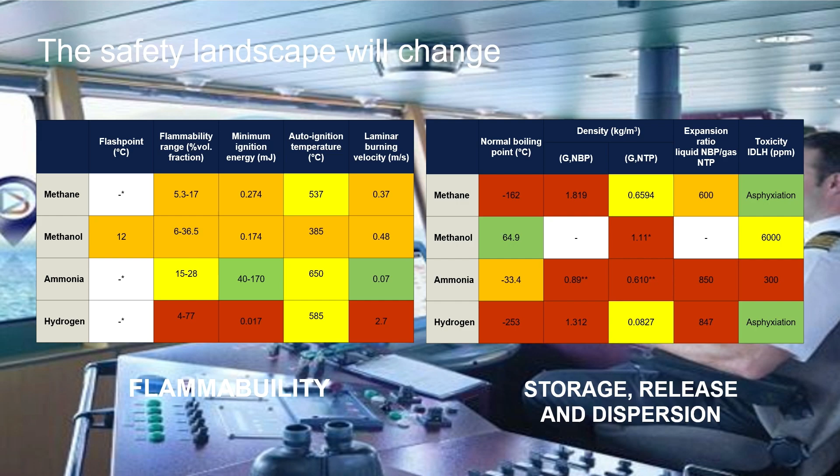As we see, this is just a small overview of the differences of the various fuels that we are currently discussing. We don't need to go into the details of this. I hope this will be covered in the various topic sessions when it comes to the various aspects to be managed - toxicity, flammability, how can we store and transfer these fuels in an efficient manner. So that is the focus that we will keep here today.

We also see that any type of setbacks, if we are not able to introduce these new fuels and new energy carriers in a safe manner, any type of incidents will have dramatic impact on the pace that we are able to pick up new fuels.

These kinds of incidents will make trust in new fuels more difficult to gain, and it will make the time for achieving the change much slower.

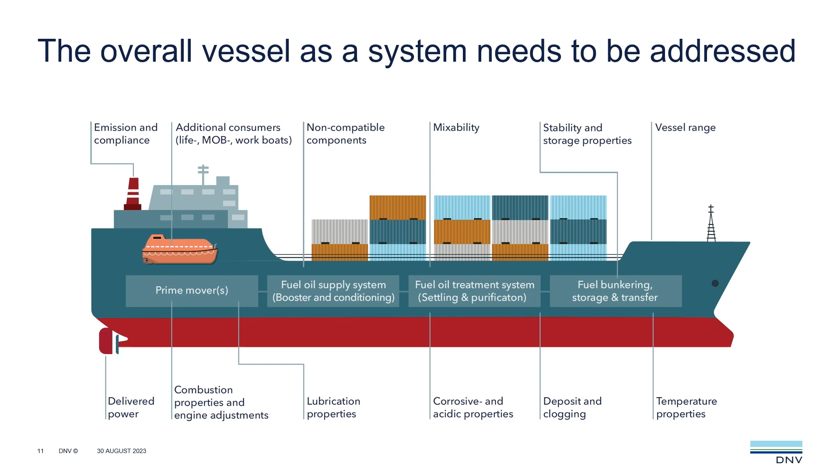We also need to see that fuel is not only what we have in the tank. This will impact the entire value chain and the entire work, both in the shipping company's offices and in the work that we have on board, as well as the knowledge that we have in the supporting supplier organizations, rule developers, etc. We need to look at the entire vessel and the entire chain of logistics and understand how the safety picture is impacted by new fuels, new energy carriers, and new technology.

And of course, being from DNV, I have to talk a little bit about rules and regulations as well. Rules and regulations are enablers for introducing new technology in a safe and practical manner.

We also see that there is a lot of development going on. We can also see that the technology as it is today is maybe outpacing the rule development. That is a gap that also needs to be addressed. How can we do this fast enough in order to reach the targets that we have set?

In addition to that, we also have rules on a global level, we have rules and regulations on a regional level, and of course we have local rules and regulations as well. We all need to make sure that these go hand in hand and are not conflicting with each other.

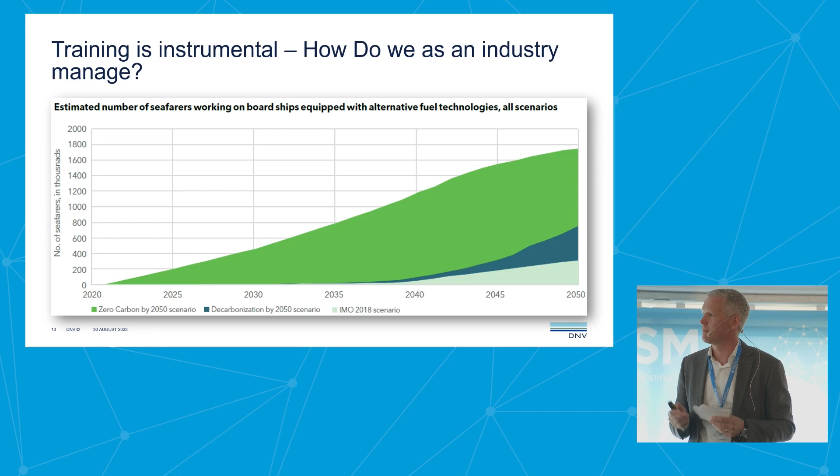Do I have to know all this? How do we make sure that we have training to address these new technologies? Can we do that change fast enough? Can universities training naval architects cope with this pace? Can training academies for seafarers manage this development? This is an aspect that is highly relevant to also address when we talk safety in a safety seminar.

To sum up and to leave the floor to the people knowing these different technologies inside out, let them talk about the safety aspect of these new fuels and new energy carriers.

I think there are some key points. We talked about the technology moving so fast and new technology being implemented. Making sure that rules and regulations are keeping up pace is key. Understanding that knowledge, education and experience needs to be boosted across the entire value chain is also a key aspect moving forward in this field and to enable the change that we're looking into.

Trainers and also, of course, retainment of that knowledge. How do we make sure that the people we have trained, the competence and knowledge that we have within shipping, that we retain it, that we keep the maritime industry a relevant and interesting industry to be part of?

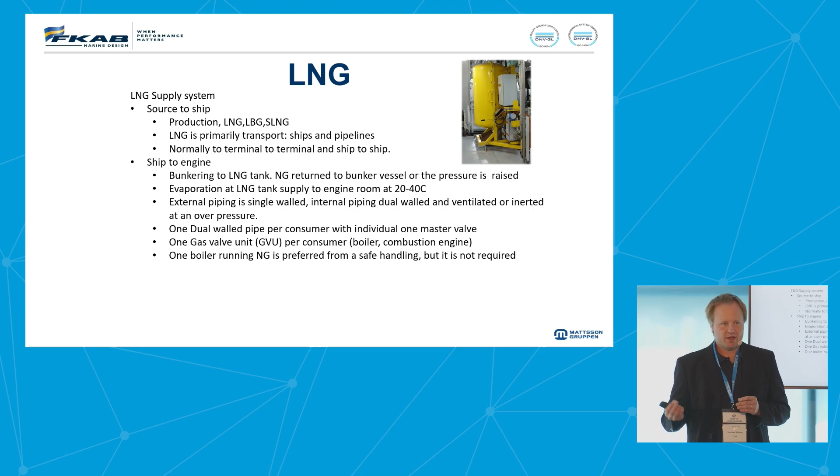When we take out the LNG for usage, we heat it up in the tank connection space to a temperature of 20 to 40 degrees, evaporating it and heating it up, and then we send it in single-walled pipes back to the engine room area where we start to go enclosed. Here we have master valves for each consumer to be able to shut down a consumer in the engine room before we send it in dual-walled pipe to the gas valve unit that is also serving individual components in the engine room. And the served units are boilers and combustion engines primarily.

We also recommend to have a boiler on board that can burn NG. Otherwise, you might need to release natural gas straight into the atmosphere. You can't handle it if you get excessive pressure or something like that. But it's not class rules to have a boiler.

So from safety concerns though, what do we look at? We have cold surfaces, we have the fire hazard, we have leakage, we have the environmental parts, and then we have the bunkering process that we need to consider. So cold surfaces, we are talking about a cold media that you cannot touch. You will get cold burns.

So we need to focus on exposed flanges and pipes. Normally this is mitigated by having either insulation or by putting these pipes in dedicated areas where you normally don't have access, like in the tank connection space. And when you work with it, you use protective clothing. That would be during bunkering procedures and also during maintenance. The NG piping, it's not that cold, so it's not really an issue with the cold surfaces.

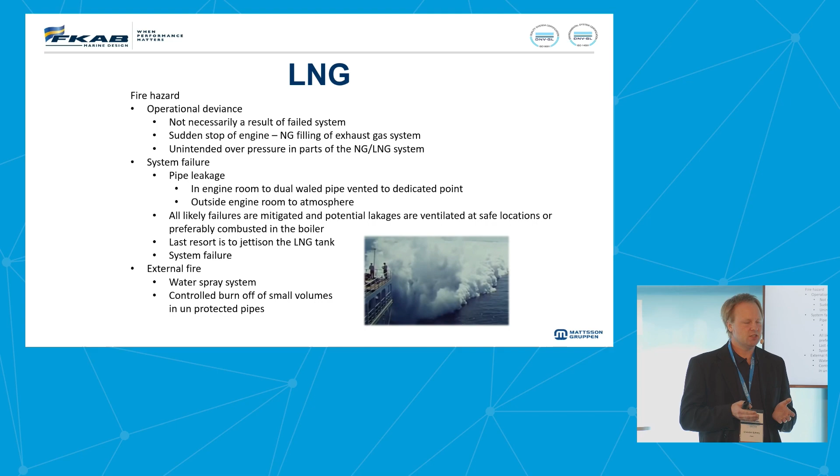Then we have smaller pieces of pipe, like the NG pipes connecting the tank with the engine room. If these burn, it's not good, but it's considerably safe compared to a fire on deck. So leakage then. Leakage could be dangerous since it could fill up a room, making it inert. So people within it would suffocate.

In the engine room, we have dual-walled piping that is either ventilated or inerted with overpressure, and then we have detectors to see that there is no natural gas in those pipes. In case we have leakage in the engine room, we have an emergency shutdown system that will shut down the engine room if we have single-wall pipes. If we have dual-wall pipe and detect gas in the pipes, we will shut off the LNG piping and close the master valve. In the case where you have dual-walled piping all the way, you will switch over the main engine from natural gas to diesel and continue operating.

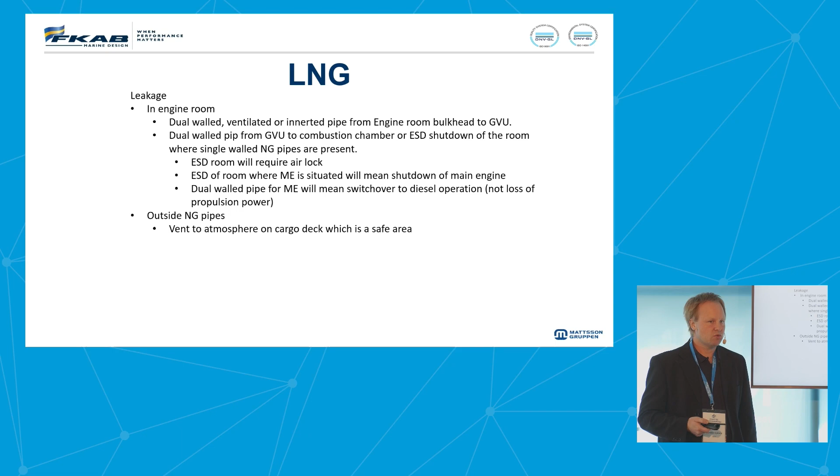In the case where you have emergency shutdown of the room, then you will have a blackout, principally. But we need to shut down the rooms if we don't have dual-walled piping. Outside, if we have damage, then it's vented to the atmosphere. It's the way we have to operate.

From an environmental perspective, LNG is generally positive. When combusted, we have less CO2, less PM, less NOx and less SOx than conventional fuels per energy unit. And in the case of leakage, we do not really have any sticky residues that will float around on the sea and cause havoc. We will only have the gas that goes down into water and then evaporates and it's gone. We can't do anything about it. We could see that in Nord Stream, among other things.

But when we leak methane, we have great greenhouse potential. That's a potential of 23 to 85 times that of CO2. So it's not really good to release unburnt methane. Going on to the bunkering.

A leakage during bunkering, the thing we are most afraid of is to get it on the steel or in between the ships. Because if we get it into the water in between the ships, it could expand rapidly and push apart the ships with damage to the ship's side. Or if it's a large spill, we could also freeze the side of the ship and make it rupture.

We also need to consider this in the bunker station. So the bunker station is protected using a stainless steel drip tray, and then we use water spray or a water curtain to protect the side of the ship. We also have breakaway connections in the case the ships are parting, so that the flow is stopped, and we have ESD connections to actually shut off the pumping on both sides and close the valves in the case that the connection is broken.

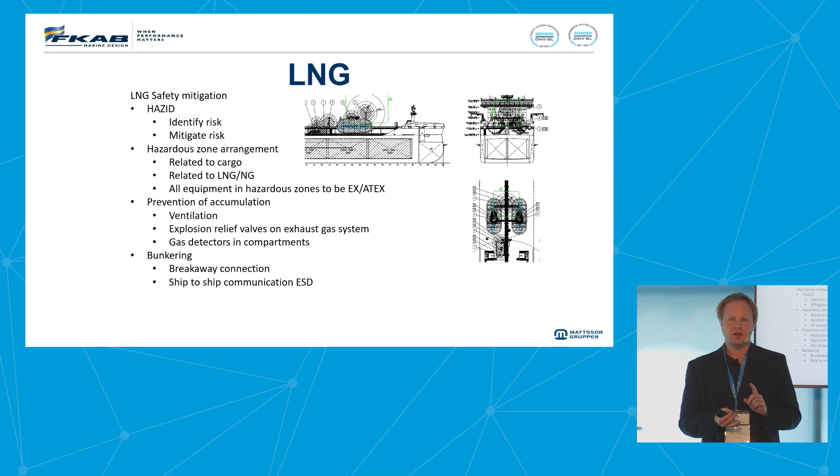And then we need to mitigate it. We need to put the places where we have release of gas in places where it's not dangerous, and we need to see that equipment in this area is EX and ATEX classed. In closed compartments, we need to ensure good ventilation. We have gas detectors to see that we don't have buildups of gas, and for example in the exhaust gas systems where we expect to have the potential of gas filling, we have good ventilation and we have explosion relief valves if it were to ignite.

And as said, for bunkering, we have breakaway couplings and ESD connections to be able to shut down the bunkering procedure. There are certainly more questions and more details to this as well, but that's for another meeting.

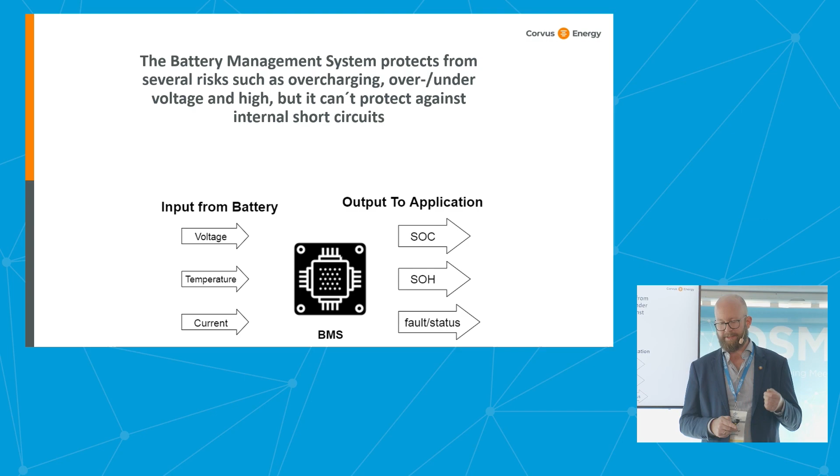They can, in rare situations, have failures due to deviations in production or other defects, or how they are treated on board, which can ignite a thermal runaway. We try to mitigate most of those causes by having a sound and good battery management system that protects the battery cells from external loads such as high temperature, high voltage, and also under voltage. But still you can have that internal cell failure, and that can escalate quite rapidly. You get gas, you get heat, so it's something that you need to manage.

Our point of view on this, at least from Corvus side, is that you need to have a passive system that handles that risk, so you're not depending on other things to limit that incident. You need to build that into the design of the system to handle the risks that the system can cause to the vessel. You need to contain that failure mode. Because if you have a lot of other different systems to protect the vessel from a risk that your new technology introduces on board, you are depending on several other systems that can fail. They can have latent defects, and if you are relying on those and those fail, you are in a pretty bad situation. So we need to have control of these risks.

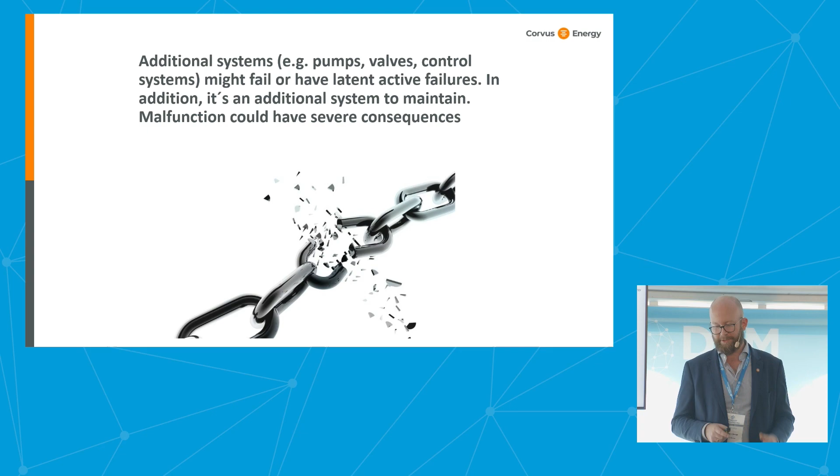And I stole this from some IMO regulations: you should do this through design. You shouldn't rely on safety through the idea that the new technology you introduce on board is safe due to some operational procedures or anything else. It should be sound and good design that gives the safety to the system and also the vessel.

And this is something that we need to do together, because safety is not done by one. And when we are introducing all of these new technologies, such as batteries, it's still new technology. Even though we have more than 800 projects that have been on board vessels for 7 years, there are still things that we don't know. And we need to use that learning to improve the safety, because as Mikael said, if we get huge failures, we will stop the transition.

We use all of that knowledge that we learn from all of our projects to share, and also share the failures we have with our clients, our ship owners, and the regulators. So we openly share when shit hits the fan. We tell what went wrong. If it was our fault, we will tell. And we also need to give support to our ship owners or our clients that have these technologies on board, so if something happens, they can reach out, and we can help and support them.

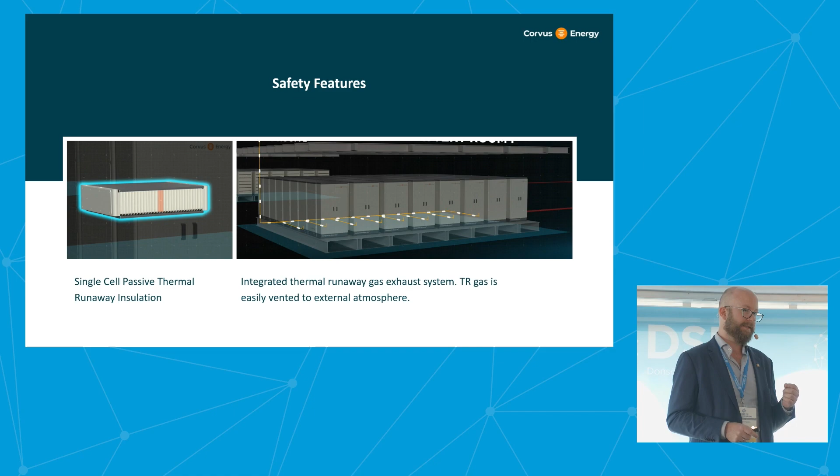But in addition to containing it to only one cell, we also want to have that gas taken out of the battery room. We don't want that gas released into a battery room on board a ship, you have sources of ignition there, you have the batteries themselves. So we want to have that gas taken out of the battery space. Our battery system is enclosed, so if you have a cell failure and all of that gas is released, it's ducted to a safe location outside the vessel and to atmosphere.

And yeah, this is probably a bit overachieving because the requirements are not on cell level, but we have done experiments and seen what will happen if you release all of the gas and ignite that. We also need to keep in mind that these are systems that go on vessels, not the same as battery systems in cars. In a car, you have 4 people and 4 emergency exits, so it's easy to get out. On a vessel, you need to increase that safety level compared to automotive battery systems because you are on a ship, far away from help, and you need to ensure the safety of the crew and passengers. So we need a higher safety standard than automotive batteries.

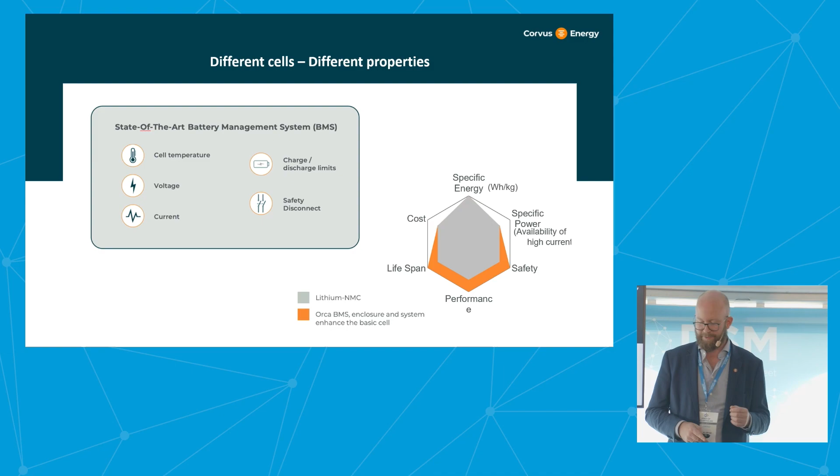So we need to build a battery management system that protects the cell so it doesn't do things that it shouldn't do. And also keep in mind the lifespan of the battery system. We want to have it in operation as intended. So all of these are parameters we need to monitor to ensure a safe battery system, because if you overuse it, use it more than it's designed for, with more cycles and all of these, you can deteriorate the cell, so you might introduce a thermal runaway due to that as well.

So there are a lot of things we need to keep in mind when introducing batteries. You can have failures or risks that are external to the energy storage system, such as over temperature in the room, fire in the room next door. So mechanical impact, deformation, all of these things can create a hazardous situation with the battery system. Also water, external short circuits, and all of these are things we need to focus on when implementing it on board.

And also there are fault conditions that are internal to the battery system, such as internal short circuits creating thermal runaway. Production faults also can lead to thermal runaway. And also sleeping faults or latent faults, such as software issues and all of these things we need to have control of to ensure that the battery system is safe.

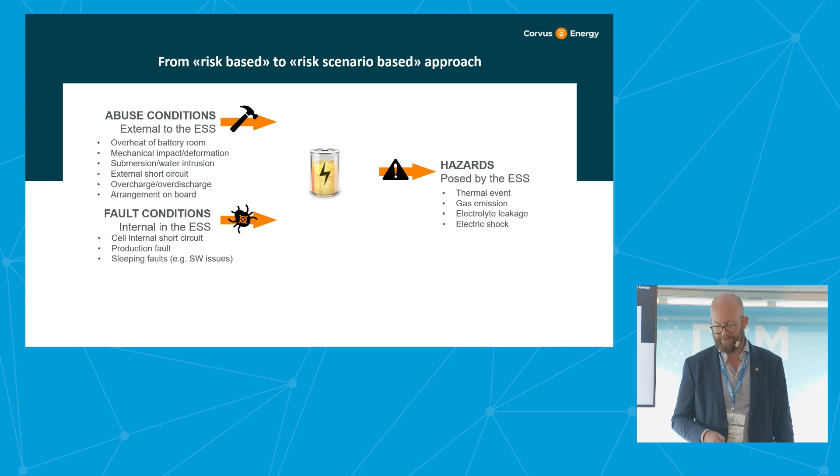And all of these things can lead to hazards posed by the energy storage system. You can have thermal events, gas emission, electrolyte leakage, and electrical shock. So it's a new thing that we introduce on board, and we need to focus on all of these things when implementing it on board vessels, because all of these are something you get when you get a battery system on board. You can't move away from that.

So it's not something that only one stakeholder can manage. It has to be a cooperation. It has to be us as a battery supplier — we need to give input to all of the other stakeholders on how to safely introduce these things on board. The system integrator plays a vital part in managing the batteries, using the batteries, and how it's integrated on board the ship. Shipyard and ship designer are also key stakeholders in ensuring that the battery system is installed in a safe manner, complying with regulations and specifications, but also having a safety view on how it's installed on board. Approval bodies and the ship owner and operator as well.

So crew training is something that's vital to ensuring a safe battery system, because you need to keep an eye on different things than you used to do when looking after a diesel engine. There are other external hazards you need to keep an eye on. So crew training is very important, and that's one of the things we have seen from the incidents we have had, is that the crew wasn't necessarily sufficiently trained, so they didn't act as they should have. They used everything they had instead of going in a strategic manner to mitigate the cause.

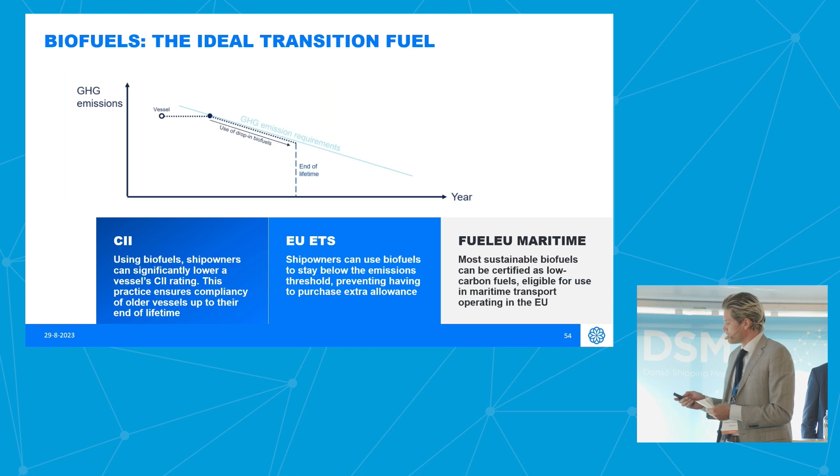Of course, the very monumental MEPC 80 was a great step for biofuels, paving the framework for the use of biofuels for your IMO DCS reporting. Basically, what it says is that if you're purchasing biofuels that are vetted by a certification scheme, meet certain sustainability criteria, and have a minimum CO2 reduction, then you're able to report this under your CII and IMO DCS.

Also a big breakthrough is that there's an interim guidance that approves the tank-to-wheel, tank-to-wake approach as 100%, because biofuels are then seen as a 100% reduction due to their biogenic origin.

Then there was the introduction, safety-wise. I would say biofuels are, in the whole range of future fuels available, on the very safe side. So that's easy—just before the coffee break, we can relax. It's not the biggest issue when thinking of biofuels, but I'll address a couple of points.

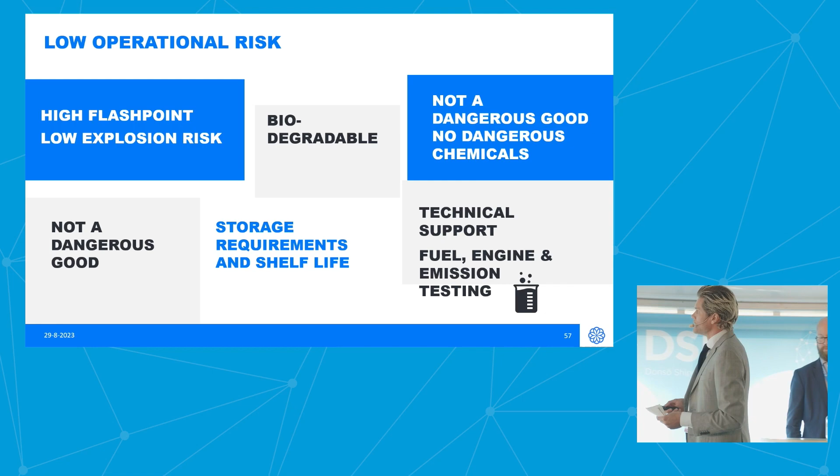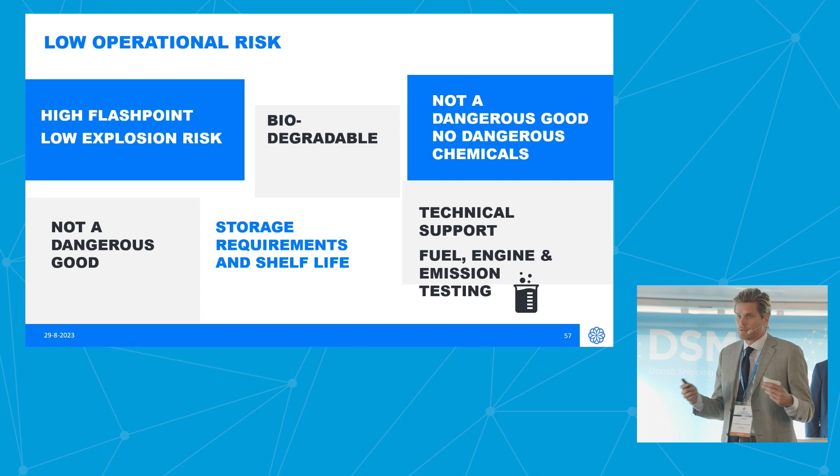Biofuel has a high flash point, above 100 degrees Celsius, so explosion risk is very minimal. It's a biodegradable product, which is good for environmental purposes, obviously. It's not a dangerous good, and it doesn't contain any dangerous chemicals either—no benzene like fuel oils. So that all makes life easy for the use of biofuels, and it's a very easy way to implement a decarbonization effort.

Important things are storage and shelf life—two items that are important to know about for operational continuity. When it comes to storage, you'll need tank heating for biodiesel. The fuel needs to be stored at a continuous temperature, about 10 degrees above CFPP, with CFPP typically lying around 8 to 15. So it's important to notice it will be heated at all times.

Shelf life is a question we get quite often—how long can you store it on board? We recommend for 100% fuel a maximum of 4 months, which gives you some space. We've done quite some tests with different clients, whereby we've actually tested it after six months, and that all went fine.

If you're not certain about the compatibility, the homogeneity, or the working of the fuels after 6 months, we can always do a spot test to see if it's still good—this is for 100% biofuels. If you're blending, like making a B30 blend, you can easily store it up to a year. Or with renewable diesel, you can store it for much longer.

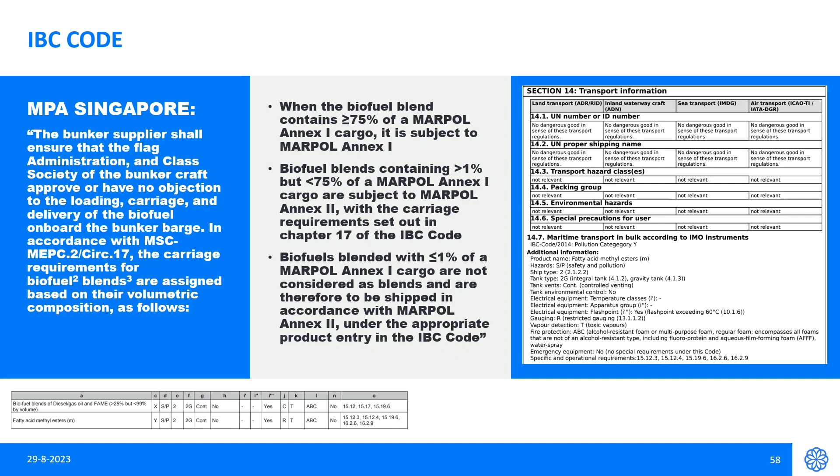MARPOL dictates that when you have more than 25% biofuel on board, the fuel is seen as a noxious liquid, meaning the treatment should be done as if it's a safety and environmental hazard. This means you need a very different type of barge than fuel providers actually have on board or in their system right now.

And that makes it a little bit difficult. So if somewhere around the world you want to deliver more than 25% biofuel, you would need a completely different barge, namely a chemical tanker.

Now if you look at Europe, this is not the case, because over the years there's been an agreement for inland barging whereby it's allowed to have 100% biofuel in your barge. So in countries like the Netherlands, which is the biggest port for biofuels so far, you can just deliver 100%, with no limitation on the uptake.

Looking at another big port like Singapore, you'd have to limit up to 24% biofuel. That being said, it shows the track record is there—that from a safety perspective, it's not difficult to deliver more than 24%, up to 100%. So the big question to the IMO is, why are we still limiting the uptake of biofuels outside of Europe?

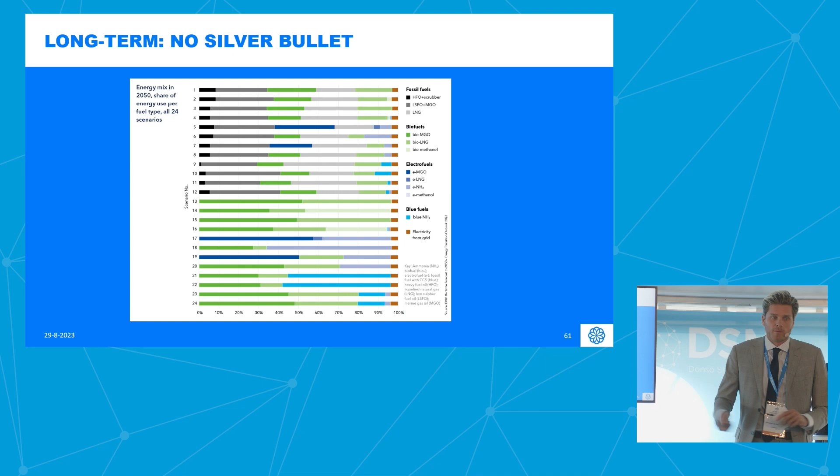Availability is of course not only about location, but also the availability of feedstocks. Another nice graph from our friends at DNV shows the expected fuel mix for 2050. In green you can see, across 24 different scenarios, the role biofuels will play. So will there be enough volumes to serve all of this green part of the shipping industry?

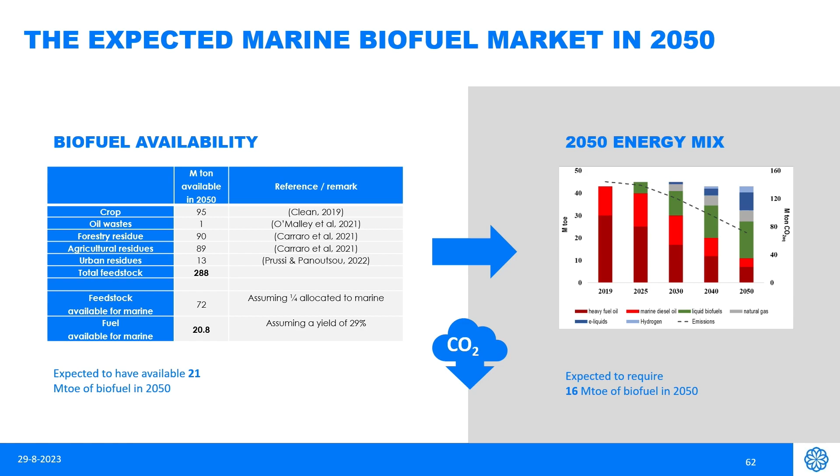We've done our own research. On the short term, we really don't see this problem—the demand doesn't meet the supply at all yet, so there's a lot of room to grow.

Looking further into the future, to 2050, we've done our assessments looking at waste and residue streams. Of course you only want the sustainable biofuels, then allocating the amount of available feedstocks to the marine industry. We've taken about a quarter, since feedstocks are also going to aviation and to road transport.

All in all, we expect to have 21 megatons of biofuel available in 2050, whereas the expected demand—looking at that DNV slide we just looked at, from a big study—is only 16 megatons in 2050. So we should be in the clear on that side as well.

Last point I want to discuss is sustainability and transparency—super important now that the biofuel business is growing. How do you make sure you're actually buying a sustainable product? We've seen earlier in the year some fraudulent feedstocks coming from China—a big problem, of course, and it makes the whole biofuel business look bad.

So what do you do? You need to select a supplier that has done its due diligence, that knows its own suppliers and has a good idea of the whole supply chain.

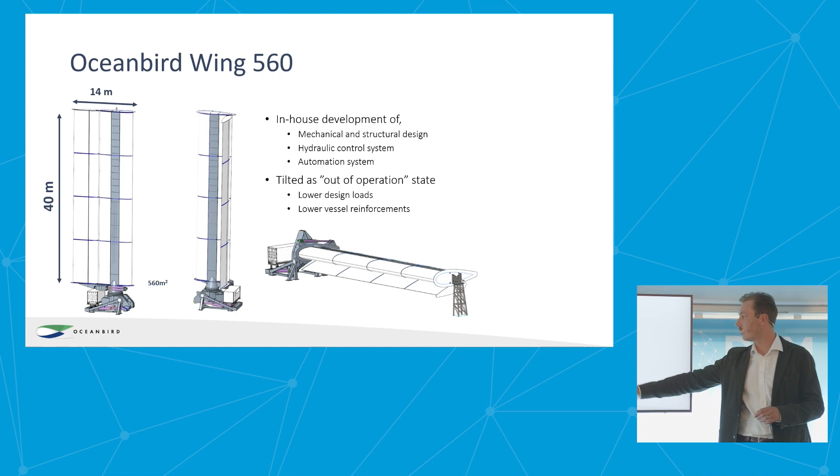We are a wing sail provider. This is our first product that we are working on, a wing sail that's 560 square meters. We have in-house development of mechanical automation and hydraulics, and our unique system is that we have the out-of-operation in the tilted state. So we would like to lower the design loads on both the wing sail and the vessel itself.

And we just recently were approved, or granted an approval in principle from DNV. Later this year, we will start the assembly process of our land-based prototype in Landskrona. And next year, we will have a seagoing prototype, or seagoing test rig, on board Wallenius Wilhelmsen's vessel, Tiranna.

But we are not the only provider out there, and there's a wide range of technologies. We also have the rotor sails that's been up and running for 12 years by Norsepower. It's basically large spinning columns that utilize the high RPM to induce the Magnus effect to thrust the vessel forward. We also have soft wing sails. The difference here is that they have the membrane made out of soft fabric, so you can allow the wing area to be reefed in order to reduce the loads.

You also have the ventilated foil systems. Here you utilize fans in order to suck the boundary layer around the wing profile to make a more stable and efficient flow. Rotor sails and suction sails are very efficient if you look at thrust per square meter, but they are also the ones that require the most energy in order to operate them. And it's important to highlight that the largest products within this portfolio can produce the equivalent of 3 megawatts of main engine power. So if you put a few of these on any type of vessel, you could basically sail.

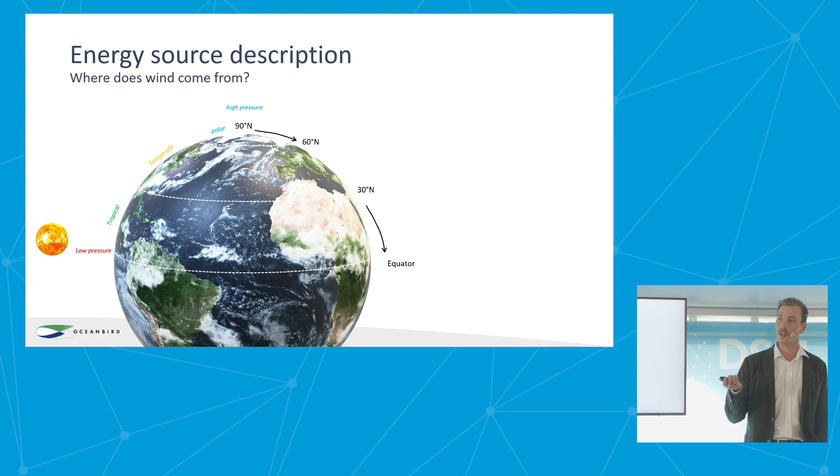This might be trivial to some of you, but where does wind come from? You have different heating of the Earth's surface due to the tilting of the Earth. So if you look at the different latitudes on Earth, you can see that along the equator, you will have the air with the most heat. So that will be the low pressure area. And in the polar zones, you will have high pressure area. And air tends to go from high pressure to low pressure. And once it's been heated up, it will rise up and recirculate back.

In between 30 and 60 degrees latitude, you will have the same phenomena, but the other way around. And this will happen all along the longitudes of the Earth. And if you look into the polar zone, you can see that air that goes from north to south will tend to go to the right due to the spinning of Earth. That's what we call the polar easterlies, and you will see the same phenomena in the tropical zone, also known as the trade winds. And in the temperate zone, we have the westerlies. So that's the global pattern of the wind.

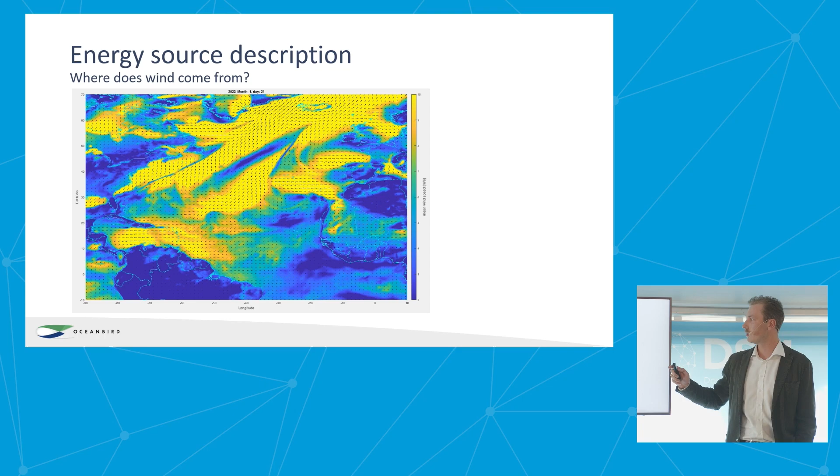If we look into more detail, what happens from day to day, you can see that wind changes quite a lot in both magnitude and direction, right? So it's hard to predict where the wind will be. You can see that pressure is basically moving all around the northern Atlantic. If you break it down and look at wind as an average from year to year, we had 2010, 2015, and 2021. We can see these global patterns being the trade winds and the westerlies.

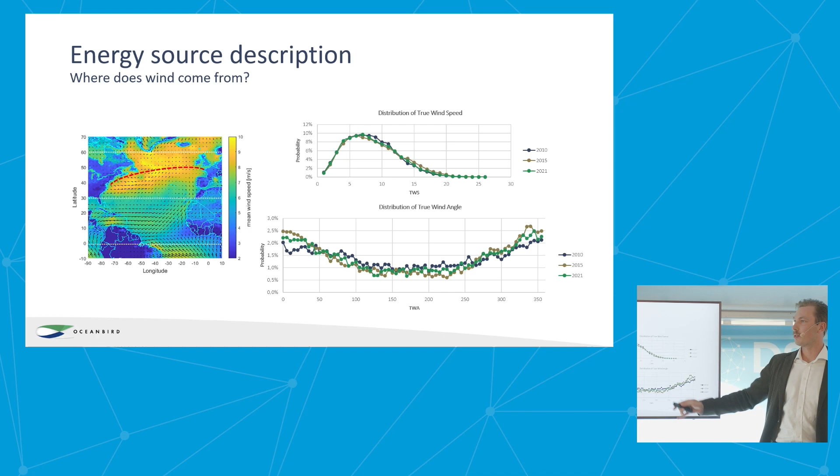And in the area in between here, you basically have no wind at all. Back in the days, that's where they dropped the horses in order to have some water left on board. So that's called the horse latitudes. Sailors would basically get stuck there. If we study a route along the northern Atlantic and look at the probability of wind, both in the true wind speed and true wind angle, we can see that the distribution is quite similar from year to year. So what can we conclude? Well, from day to day, the wind is changing quite a lot, but it's reliable from year to year. We know well enough how much energy there will be out there.

Wind can reduce the operational expenses of the vessel. We don't have any emissions, and it's future-proof. It can be combined with any fuel that's out there. We don't need any additional infrastructure. Wind is basically the free fuel. That was the pitch, and now we can go into the safety challenges.

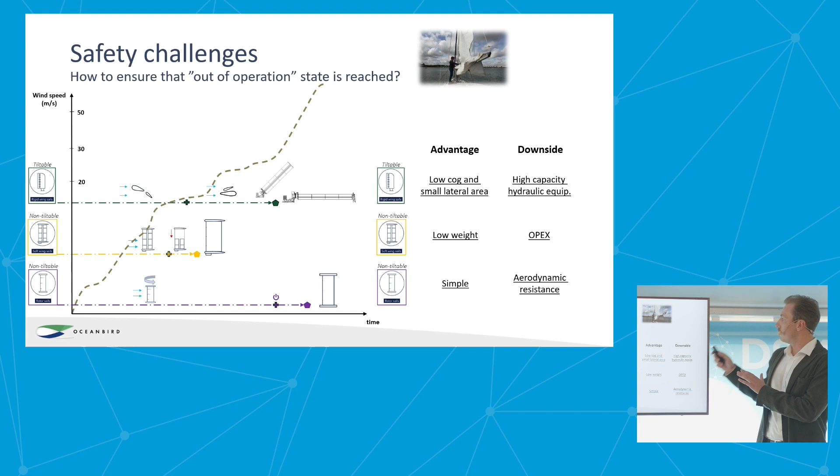The advantage is low center of gravity and small lateral area, but you need high capacity hydraulic equipment in order to ensure that you can do this procedure in all types of winds, right? These are just some advantages and downsides, but what I would like to emphasize is that there isn't one product that suits them all. It's all dependent on what kind of segment you look at, where you operate, what trading speed you have, and your cargo handling on board.

So it's quite complex. But back to the question, how do you ensure that you reach this state, independent of the solution you have on board? Well, one very effective mitigation is the failure mode effect analysis, where you basically go from the bottom up. You look at every component that you have in your product, the function, its subsystem, and you imagine that you have a failure. What is the cause? What is the effect? What is the severity? And how do you mitigate this? If you do this with relevant stakeholders, you can find things that you wouldn't find otherwise.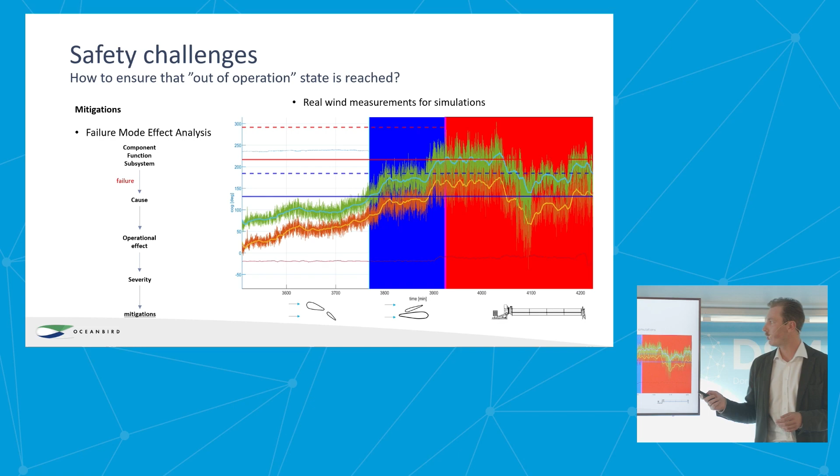Another safety challenge is the impact that your product would have on the vessel, and it's very vessel dependent. It's a function of where you place your unit in regards to the size of the vessel and your operational levels. But what we can all conclude is that the wind propulsion unit will not only deliver thrust, it will also deliver side force, right? So it will impact the leeway and the rudder of your vessel.

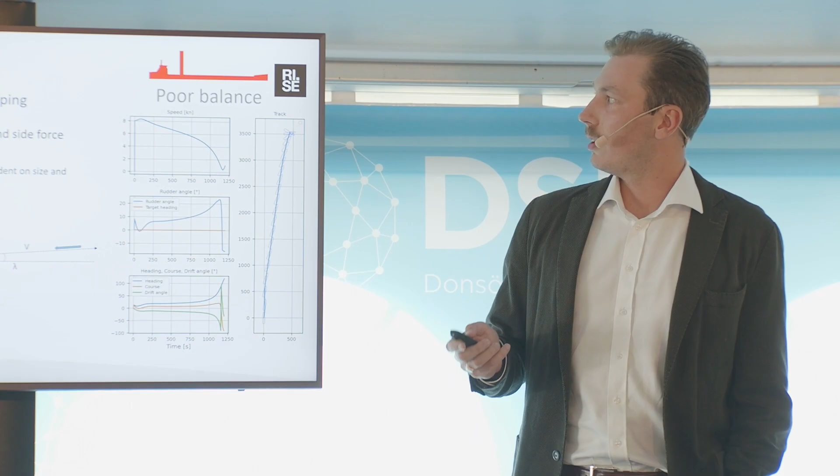Here is a simulation case done by RISE. They have looked at a standardized vessel and they've put a WPU close to the bridge. And it's a time domain simulation. So you can see that it's starting out with 8 knots of forward speed. Its only objective is to keep the course, right? To keep the track. But you can see over time that the rudder angle is just increasing. And when that happens, the resistance is increasing and the speed is reducing. So this is a good example of poor balance on board a vessel. This needs to be studied in detail.

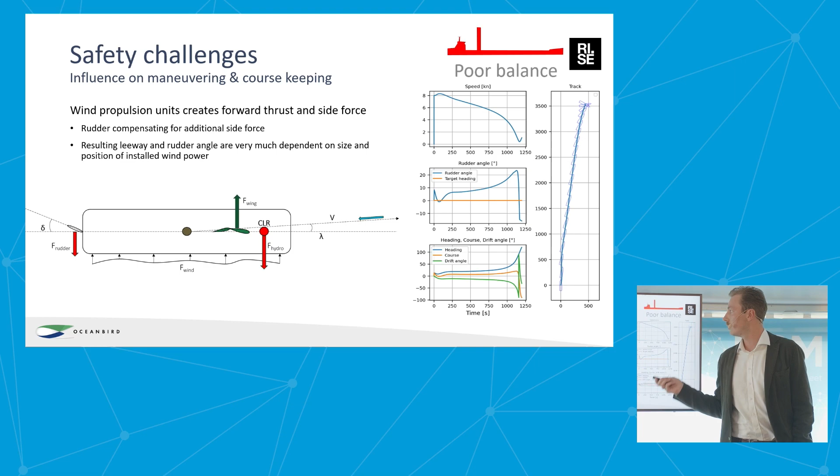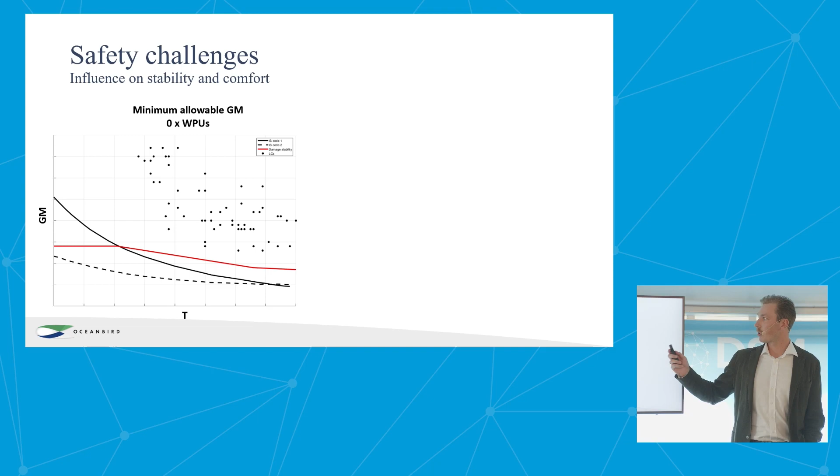Lastly, we have the influence on stability and comfort, and it's a trade-off here. For naval architects here, you can see that you have a GM versus draft curve, and that for all loading conditions, we are fulfilling the criteria. But what happens if you put on 4 large wind propulsion units? You can see that we are not fulfilling all criteria anymore. So as a naval architect, what would you do? Well, the simple answer here would be that you need to increase the GM of your vessel. But is it really that simple?

So to summarize it, what kind of mitigations do we have? Well, perform continuous FMEA and hazard analysis to identify areas in your system that need to be further investigated. You can develop simulations and train with measured environmental data to predict unpredictable events or to teach the system. You need to involve stakeholders early on. That could be the crew, could be the flag state, could be DNV. And for vessel designers out there, you need to allow for vessel design iterations in order to look into all of these aspects and design a really good vessel.

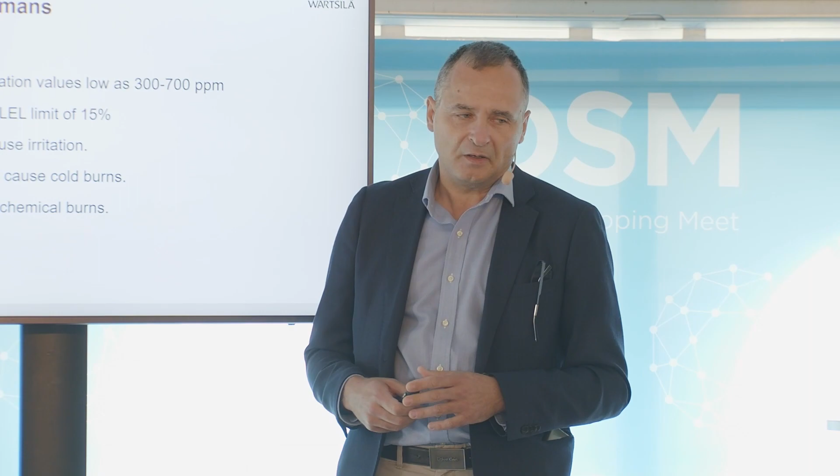When you are exposed to ammonia and you don't have personal protection gear, you will get irritations in your nose, you will get irritation in your eyes. Ammonia binds to fluid in our body and then starts to cause irritation and destruction of tissue. So it's really dangerous to be exposed to ammonia, and this is why we need to be very careful. On the other hand, it can harm us in so many ways, but at least it will not give us cancer. So something positive about this as well.

We have been using ammonia since 2021. So we have built operational experience with ammonia for almost 2.5 years on different engine types and in different facilities. Here we can see our test facility that we are using in Norway on Stord Island. And together with the Catapult Center and other partners, you can see here, we have established a testing facility with a Wärtsilä engine. This is a 34DF engine. It starts from a gas platform.

We heard this morning so much about LNG from Christian, and we can only say that there is a really good baseline from the LNG industry. There are procedures, there are technologies that could be applied more or less directly, and they are 95% plus identical. We can use that, and then we can build on that and add the additional safeties for ammonia. So this is a gas engine to start with, and we use this engine in a facility where, you can see, we try to simulate a ship.

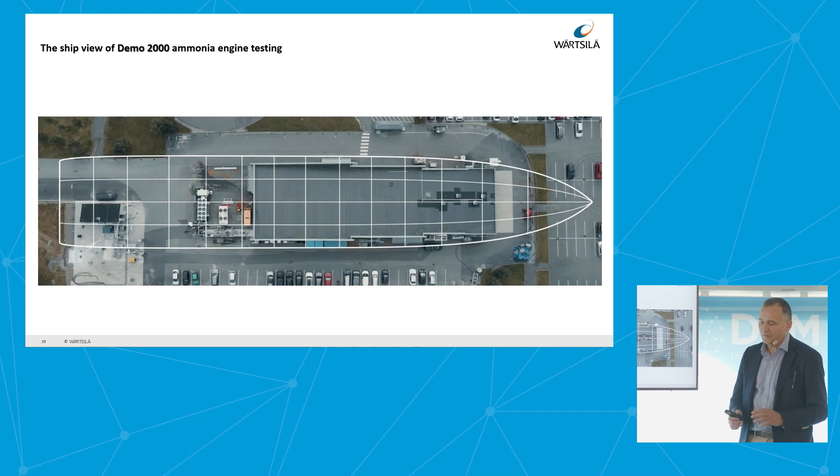So, from the bunkering station where we can bunker liquid ammonia to a tank and to the fuel supply, and here in the middle we have control. We also have connection to the electric grid, and then we have the ammonia engine in front, and we also have the full exhaust after-treatment processing.

This engine has been running on ammonia for 6 months, and we have planned to continue running ammonia for another 6 months at least. One of our test facilities. We have one more test facility in Finland where we test 2 other different engine platforms as well. So we are testing ammonia on 3 different platforms.

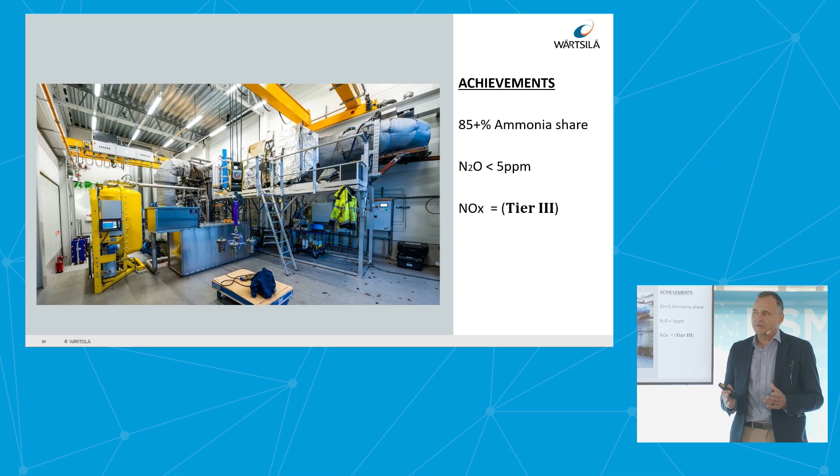What have we learned then? We learned that we can use ammonia as a fuel in marine applications. We have had good results with up to 90% ammonia share at certain loads, but it's not as easy as it may sound. It has challenges to use, but we have achieved at least 85% ammonia energy share. So we can replace 85% of the energy of the conventional fuel with ammonia, which does not have any carbon. So it's carbon-free.

A lot of discussion has been about nitrous oxide, laughing gas. This is a highly potent greenhouse gas, with a potency of around 300 compared to CO2. And here we have managed to keep the nitrous oxide emission below 5 ppm at the exhaust. So, really good results. I think with this setup we can also say that we lower CO2 emissions by 80%. So this is what we are happy with.

You will need an SCR in order to handle the emissions from ammonia. When you burn ammonia you will have a different type of emissions. You will have unburned fuel, because ammonia is very inert and hard to combust to 100%. So there will be some ammonia slip, and you will have nitrous oxide, laughing gas. All of this could be handled in the SCR.

If you look into the same facility, this facility can also be used as a training facility for future ship owners, where we can train both bunkering and other operations.

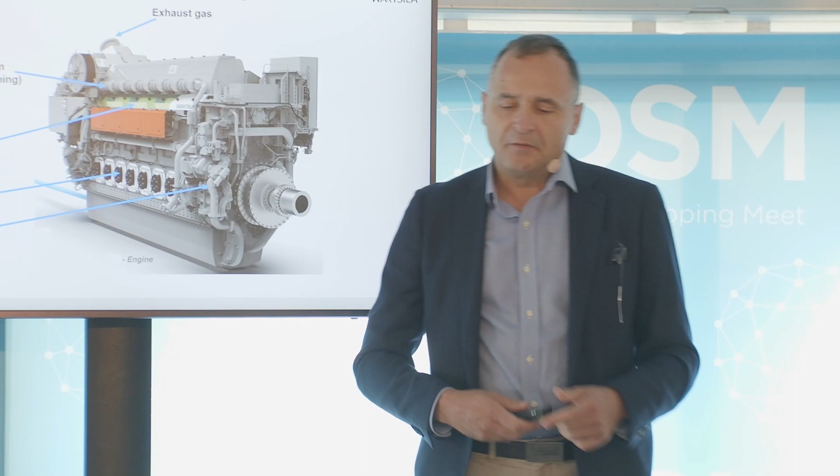So, good base, bunkering went well. There was no leakage during the bunkering process. Everything went smoothly, the first bunkering. But if you look at the engine side of the equipment, here you can find a couple of potential points where you can actually have leakage from ammonia. You can have leakage to the exhaust gas, you can have leakage to the crankcase, you can have leakage to the liquid fuel system. So we need to equip the engine room with various detection sensors in order to be safe and detect any potential leakages.

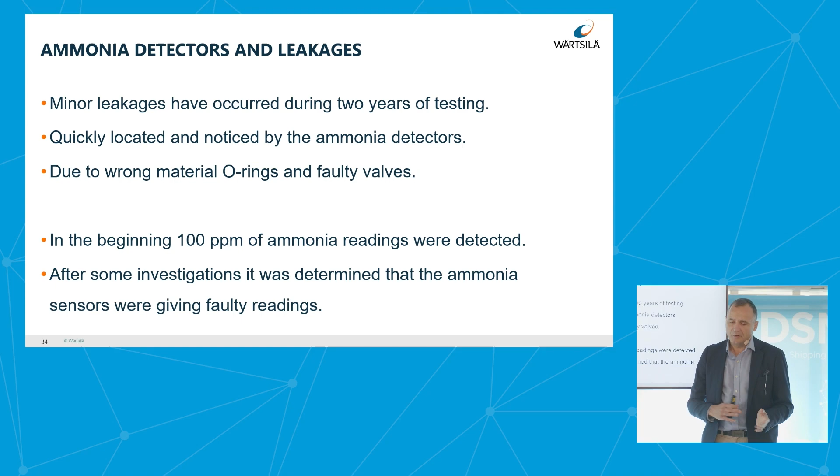During testing we have had a couple of minor leakages. During the first testing we had minor leakages mainly due to the wrong materials in the system. Some O-rings were not feasible, not good for ammonia, and then we also had some faulty valves. Once we handled these teething problems, we did not have any more leakages on the ammonia system.

Also, the sensors in the beginning were detecting 100 ppm, but since we could not smell or detect ammonia leakages, once we investigated further it was found that these were faulty readings on the sensors. So a lot of teething problems in the beginning, and of course there will be teething problems in the application on the first two ships, but no major ones from what we could see.

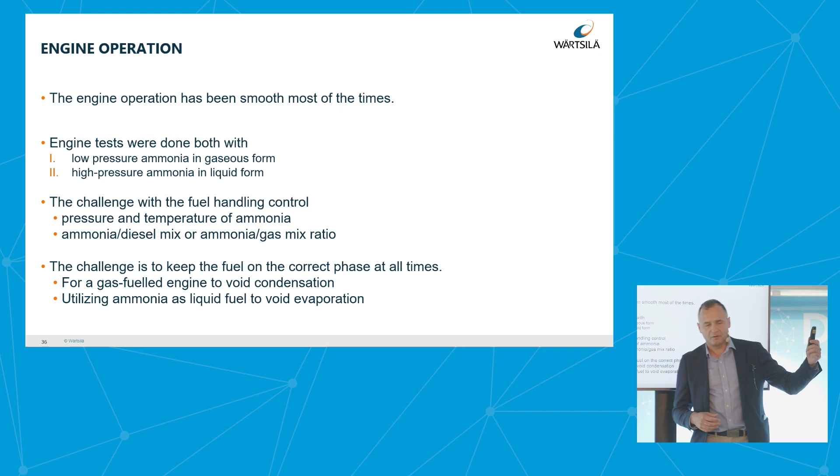Another challenge is to keep the ammonia either in gas or liquid form, depending on which system you use. The tank might be located in one location on the ship, with maybe 40-meter pipes to the engine, so you need to make sure the ammonia does not condensate if you're using a gas system before the engine. Heat trace on the ammonia supply system will probably be needed depending on the pipe length.

What more have we learned? During normal operation, we use the same principle as for LNG. The engine room is the gas-safe space. Everything is double-walled and monitored. Ammonia detectors and gas sensors are installed in all locations where leakage can be expected.

We have been running in two different modes: the Otto combustion mode, and also with high pressure liquid, which is still in the research phase. We believe gaseous ammonia will be the first product to market, and liquid ammonia will be the second.

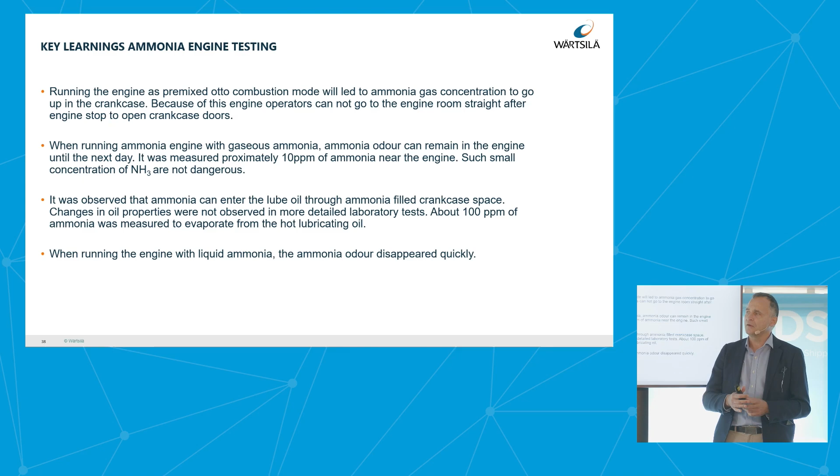As mentioned, about 100 ppm of ammonia were measured evaporating from the hot lubricating oil. This means that when you run on ammonia and stop operation, you cannot just open up the crankcase and start repair work. You need to monitor for ammonia content in the crankcase, and since the crankcase is ventilated, that ammonia will need time to be ventilated out.

Personal protection equipment is really important, and this is where safety trainings and procedures should be in place—ones we are developing now based on our accumulated knowledge and learnings from the testing.

Even though no major leakages occurred during our testing at both of our facilities, some small ammonia leakages were there. So you can expect that some ammonia might leak into the engine room during operation, which is why personal protection equipment is really important, along with other safety measures like ventilation and ammonia leakage detection.

Additional design elements are required, especially when it comes to materials. As an engine manufacturer, we are researching what kind of materials can be used and approved for ammonia. Stainless steel is used throughout the system, but all connection points cannot just be rubber elements or O-rings—they need special elements adapted for ammonia.

How am I on time? I'm out of time, okay—I kind of guessed. In the shared presentation there will be a lot more material, and I hope you can reach out if you want to learn more about this after. Thank you very much.

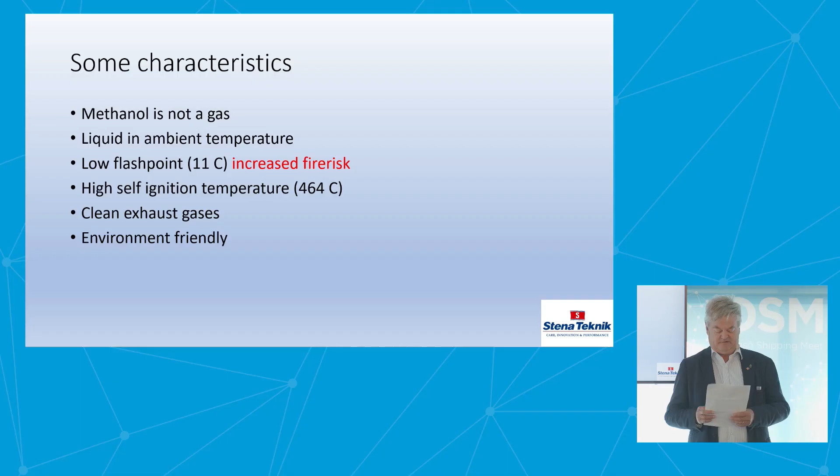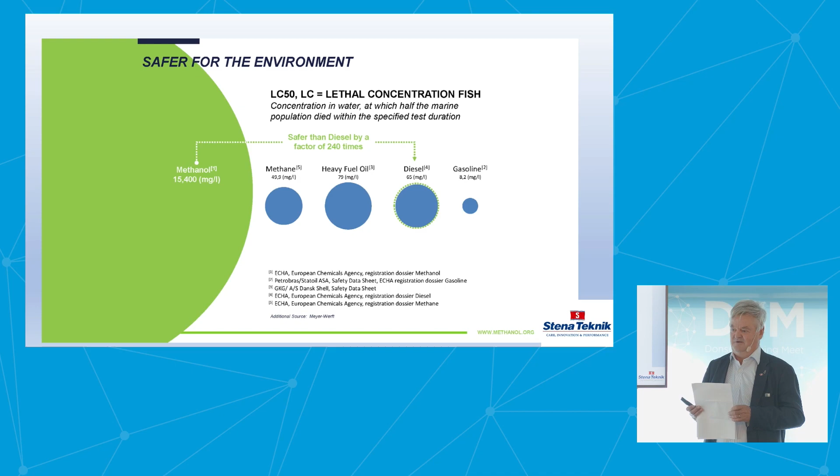Clean exhaust gases, as I said before, and also environmental friendly. What do I mean with that? Well, this is actually a picture showing how toxic different fuels are for the environment. This bubble shows how much methanol you can have in the water before half of the fish die - they call it the fish test, though it's not really fish, it's some other kinds of microbes. But if you compare that with heavy fuel oil or diesel, it's 240 times less toxic. So methanol is actually used in cleaning facilities to clean wastewater and so on - that's something I think not very many people know.

When it comes to the regulations, I mentioned that we have to consider this as a low flashpoint fuel, and therefore we have to use the IGF code under the IMO regulations. Unfortunately, the IGF code was first developed for LNG and gases, and then when that was ready in September 2015, the correspondence group continued to develop it for low flashpoint liquids - the same team more or less, the correspondence group.

So that means that a lot of the safety barriers and things that was developed for gas somehow also came into the regulations for methanol and for ethyl alcohols also. I think this was quite unfortunate, because even now when we have guidelines, they don't completely fit for methanol. So when you are making a methanol ship, you will have to do some risk assessments and so on, following the alternative design regulations, because otherwise it will not completely fit with the IGF code.

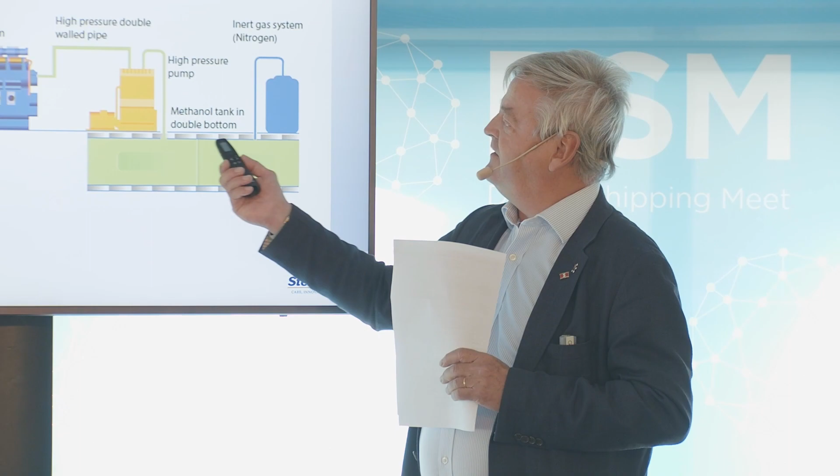So you will have a nitrogen system. In this case we had a high pressure system for the engine, meaning high pressure pumps, and when pumping methanol, high or low pressure, you have to have double walled piping. So that is double walled piping, the blanketing with nitrogen, and then some solutions around the tanks and so on.

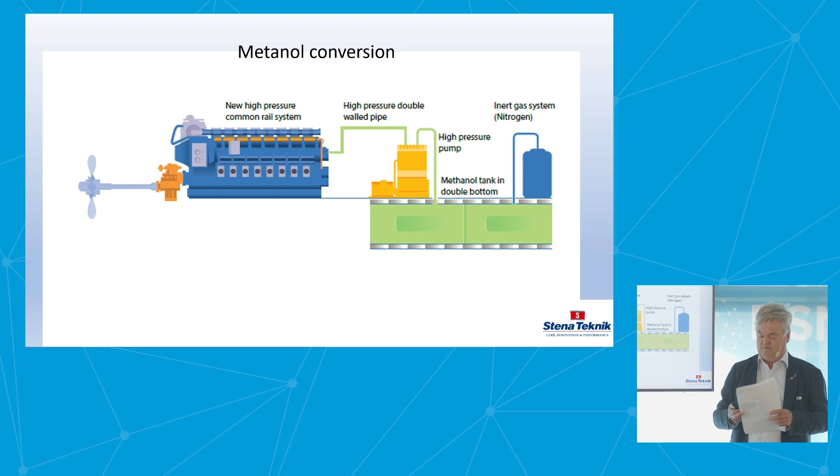On the Stena Germanica it looked like this: we were converting a ballast tank, and the surrounding of the ballast tank was filled with water, so that you had a buffer zone there if there should be a leakage or something. And then we had, of course, the nitrogen system, the pump room, and the engines here.

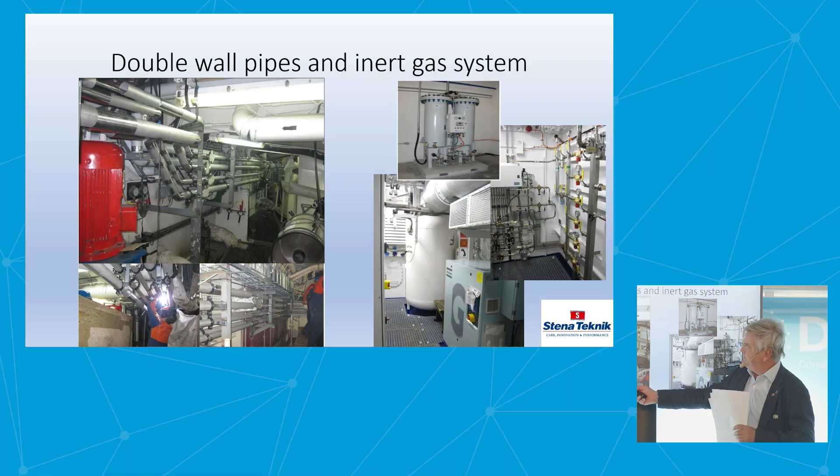So if we look at the safety equipment, the first thing I mentioned before is the double wall pipes and the inert gas system. If you look here - it's a little difficult to see - but here you can actually see the double wall pipe, and inside there is a high pressure pipe. In this case, that was for 1,000 atmospheres, so it looked like a gun rifle barrel actually, and then outside that you have the outside, or double wall.

Again, methanol is not a gas, it is a liquid. So if you should have a leakage in the inner pipe, there's no expansion when it comes out to the next one, so you don't have to worry about that. That is something I think could be looked into a little more in coming regulations, because it doesn't behave the same way as gas.

Pipes. If we look at the next thing, it's difficult to have double piping everywhere. So if you could have a room where you have pumps and things like that, and that room itself is airtight, with an air lock to get in there and so on, in that way you solve a lot of the problems around this with the double piping. That is the solution we had on Stena Germanica.

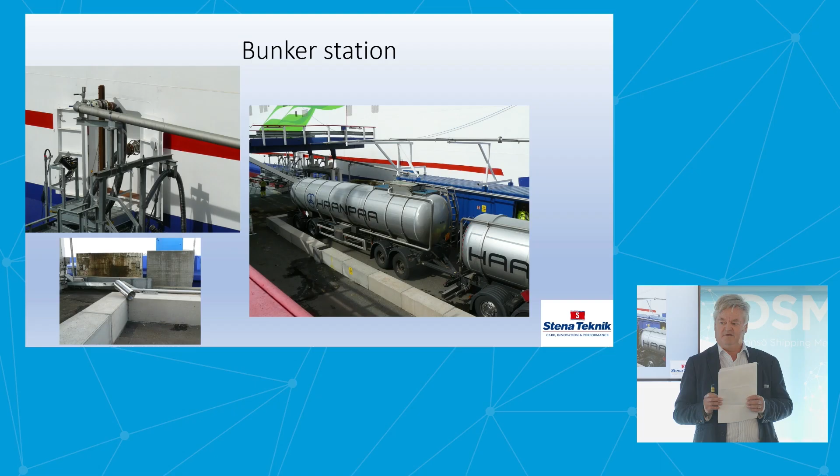And then, of course, to be able to get the methanol on board, you will have to have a bunker station. Here we realized that there wasn't any real regulations about how to bunker methanol. So we took the initiative and made something called the CWA, a CEN Workshop Agreement, which is a kind of pre-standardization - it was SIS here in Sweden that was helping us to do that. There we came up with how a bunkering station should be equipped and so on.

You can see here on the picture that you have a foam gun that could pour foam out here in this area, which is walled in, and in that way you could fight fire if you would have some fire in the area. So similar things like that.

Of course, a very important thing is the training. So we also developed a training program for the crew and everybody else that has to do with methanol, like bunkering people and so on. And there, of course, we have the safety systems that I showed you, the fire alarm, the CO2 and gas alarm and things like that. And also firefighting, where we have 3 different kinds of extinguishers.

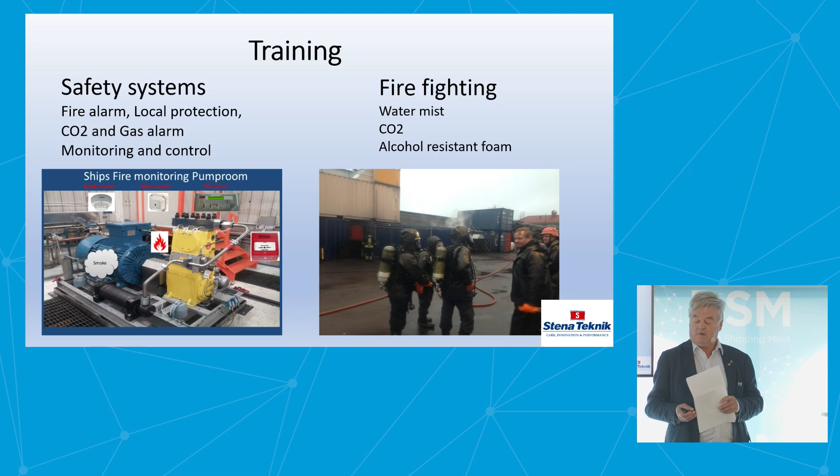That's about what I had time to say, I think, now. But just like that, yeah, that's our vision for the future, of course, that the methanol should come from clean sources, like water and air. Thank you.

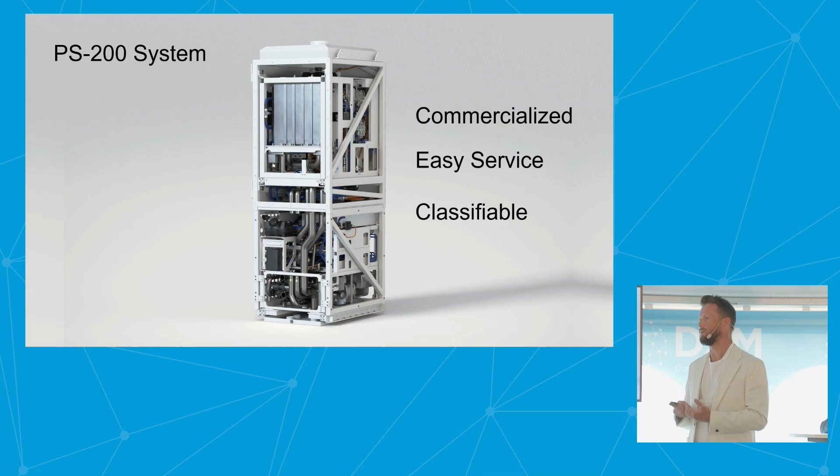So here it's the basic module that we have developed, a racked solution based out of two basic modules. It's actually two parts. The upper part is where the hydrogen is contained, and from a safety perspective it's actually ventilated and a closed space, and I will talk about that a bit later. The lower part of the module is just the utility components needed to run the stack and the fuel cell, and also electronics and stuff sitting there.

We have modularized this so you can easily pull these modules in and out. They are on skids, a little bit like the batteries from that perspective. So easy service, and it's also classifiable, which is very important to know from a marine safety perspective. I will talk a bit about the safety development that we have done. We have been part of the marine standards that are now developing for fuel cells and the use of hydrogen on board ships.

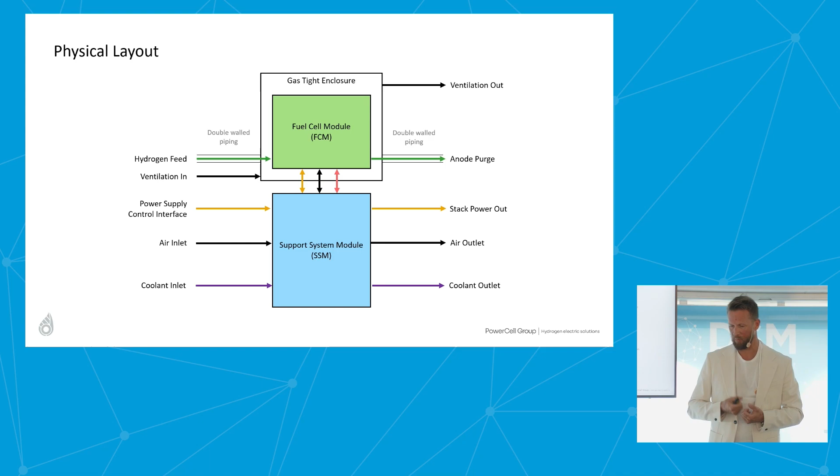So in schematics, this is principally how a fuel cell works. Our fuel cell, the green part is where the stacks are and the hydrogen is. It's a gas-tight enclosure where we have ventilated this to high dilution. So if we have a leakage, we can dilute it to a non-explosive environment. So this would require quite high ventilation to do this, depending on your gas pressure. But this is how we go about it.

You have double-walled piping going in and out of this box, so it's completely sealed off from the environment if you have a leakage of hydrogen. So in the lower module, you have interfaces with process air, compressed air, and electronics. But all those ignition sources have been collected down in the support module as much as possible.

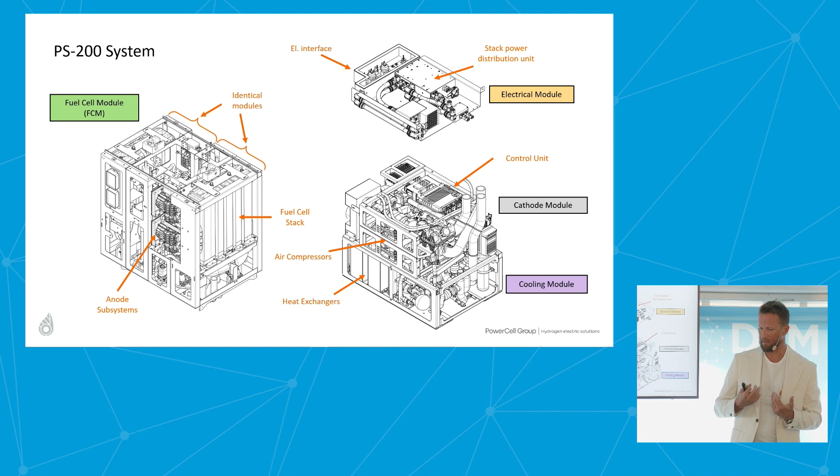Also, we have quite a lot of electronics involved, power distribution boxes and things. So we have a low voltage system and a high voltage system inside the fuel cell. So that enables the naval architects to have a completely defined module with interfaces that they can install and follow our guidelines to have a safe installation. And this is a good basis for type approval later on.

We don't have type approval at the moment, but we are working on a type approval basis. It's been a lot of education and a lot of iteration when it comes to the safety to really get the classification societies on board, so that we are on the same page when it comes to these safety layers.

So a bit of the details here. Risk assessment I've told you about. In marine terms, we call it HAZID and HAZOPs. So in HAZOPs, we identify the risks and we mitigate the risks in different ways. And of course, when you do these workshops, you gather a lot of clever people from different areas, and they have to qualify for being part of the workshop and that very important task to build the first fuel cell and hydrogen-powered boats.

So, for instance, in the Flagships project, we have gone through these very comprehensive assessments. The main risks that we've identified, it's a no-brainer, of course. Small explosions, we can have big explosions, we can have fire. So those have to be mitigated by the layers of safety that we apply to the design. Then, secondly, electric shocks and obviously burns as a consequence of the risks.

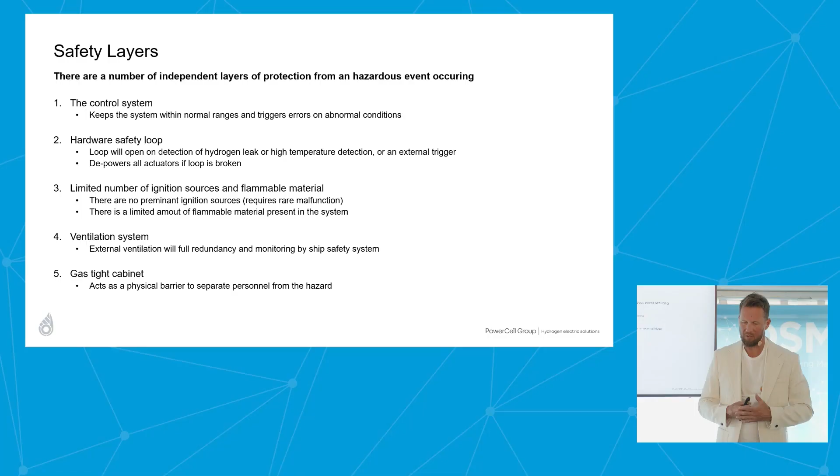Safety layers then is basically we are controlling the fuel cell with a control system. So when there is something wrong, we very early on detect that, for instance, in the stack voltage. If there's a hydrogen leak, we lack voltage, and we trip the system. That could be one thing. There is a hardware safety loop, where we have external triggers and internal triggers. So we are continuously monitoring the hydrogen pressure, to see that we always have a safe environment for the fuel cell to operate.

As I said, limiting the number of ignition sources is very important. So we minimized the electrical components to basically be the stacks themselves. They are inherently containing hydrogen and they are also producing electricity, so they need to be in this space. But you can ventilate the space and make it safe to run the stacks there. And then we put all unnecessary components that we don't want in that space in another space, the holding space.

So ventilation, I talked about that as well. We're talking about a focused ventilation system that is ducted to the unit, so you have ducted ventilation connected to the fuel cell, and if you have a leakage, you take the hydrogen out from the vessel through the vent mast.

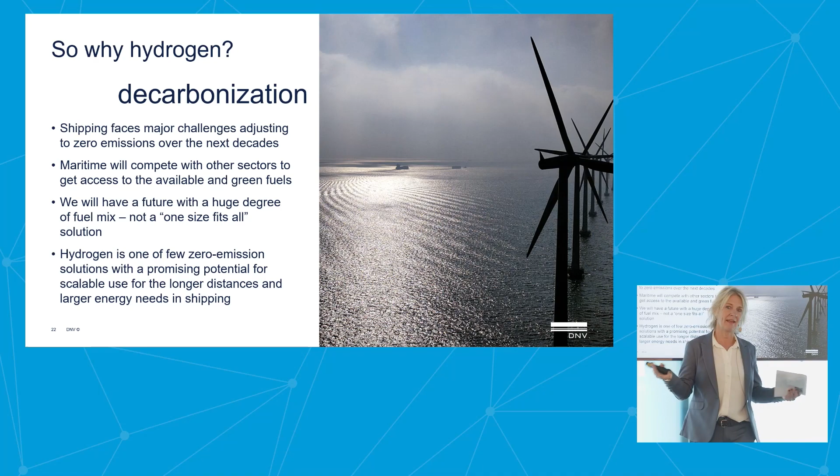That being said, the green hydrogen we have today is almost zero, right? So if we are going to get to the right hydrogen, the green hydrogen, we believe that likely it will be 5% of the energy mix in 2050, right? That is 1/3 of the amount that we really need if we are going to zero by 2050.

So the 5% hydrogen means 200 million tons of hydrogen. And we believe that 1/3 of that hydrogen is going into ammonia, which we have spoken about earlier today, 1/3 into e-fuels, and the rest as a kind of pure hydrogen.

So at DNV, we are working across all kinds of segments when it comes to hydrogen, the entire economy. We are working with the governments to look at their strategy of how to implement hydrogen onshore as well as in maritime. We have, amongst others, one we are a bit proud of: a huge testing facility, Spadeadam, where we are running multi-million dollar full-scale test programs for hydrogen.

We are testing out and looking at all safety aspects. For instance, how the UK is going to switch from methane to hydrogen in residential areas. But we are also working across all the other segments like CO2, shipping, and how hydrogen can play a role there.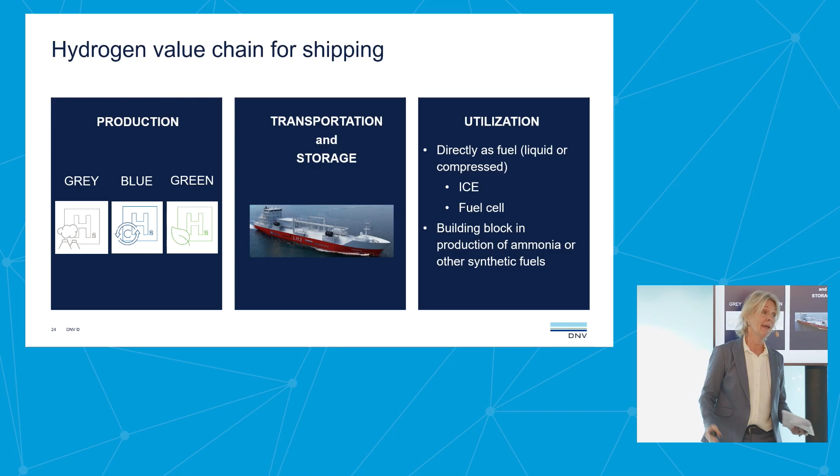The green is coming later on, and I believe that by 2035, it's going to be maybe 50-50 between green and blue hydrogen. Then we have the transportation. And transportation is another kind of, now I need to look at my notes here.

So we can transport hydrogen in several ways. It could be liquid, it could be compressed, and we could also use liquid organic hydrogen carriers for carrying the hydrogen. But of course you can also utilize it in ammonia or e-fuels.

So when we look at the usage of hydrogen, it's a little bit difficult to explain how we can use it, because you can use it directly as fuel in the internal combustion engine. You can use it with fuel cells, or you can use hydrogen as a building block in ammonia or e-fuels. So for the rest of this presentation, I focus on the direct use of hydrogen. Otherwise, I will go into every single area here.

We have a lot of challenges, and before hydrogen can be used, we need to turn all these red dots into green dots, right? Availability, simply not there. Infrastructure, maturity of technology, energy density. As of today, it's small shipping, short shipping, that could use hydrogen directly. And then the price. I cannot simply calculate it home yet.

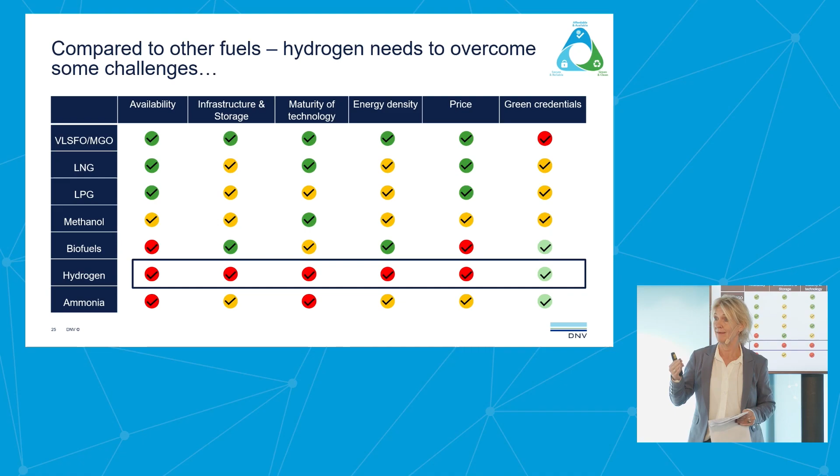So it's very expensive. Hydrogen, as I said earlier, and probably I don't need to go into all the details here, is the smallest molecule. And we are so afraid that it's going to escape, right? It's flammable, and it ignites in a mixture with air between 4 and 75%. So it takes very little before it creates a danger.

And of course, you need big volumes. Five times HFO when it comes to liquid, and up to 15 when it comes to compressed. So marinizing hydrogen is a challenge. In these two brochures that we have made, one is a handbook for hydrogen-fueled vessels. We made that as a joint development project called MarHySafe, with input also from the Norwegian government.

We have also a brochure focusing on how to close the safety gap. Because, marinizing hydrogen, and I think Martin this morning showed a picture of a hydrogen station that exploded in Oslo, or outside Oslo. I live 5 kilometers away from that hydrogen station, and when it blew up, it felt like it was next to me. So bringing this experience to the maritime industry is very important.

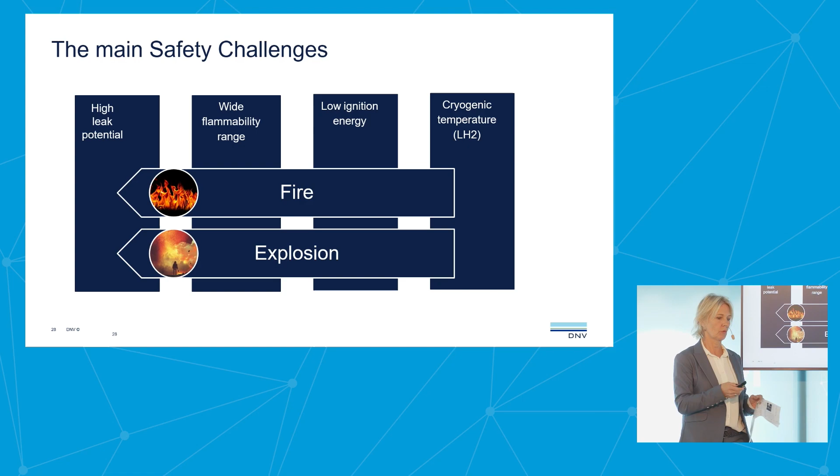So the most important here, we are really afraid of fire and explosion. It's high leakage potential, wide flammability range, low ignition energy, and then it's cryogenic. So these items are what we are focusing on when we are making our rules. The IGF code is focusing on segregation, double barriers, leakage, and automatic isolation of damages.

It's different depending on whether you have liquid hydrogen or compressed. For instance, if you have compressed hydrogen, you have it at 230 bars. With the leakage, it will take you 3-4 seconds and you have a cloud of hydrogen of 150 cubes in 3-4 seconds. This illustrates how quickly. So we need to reduce the amount of leakages and make sure that they don't disperse into the air. But it's lighter also, so it could go up.

It depends. So we, in DNV, we are making rules. They're coming soon. The IMO do not have rules for hydrogen. They are making a guideline now. I don't believe they are going to finish this year. Next year, I believe. We do, however, have rules for fuel cells in DNV, so that's the start.

But for all projects now, we need to use an alternative design process and prove equivalent safety to that of other fuels. It's a tedious and difficult project, and it takes a long time, but there are many that are doing it. And in March this year, we had Hydra, for instance. She was delivered as the world's first liquid hydrogen vessel on the west coast of Norway.

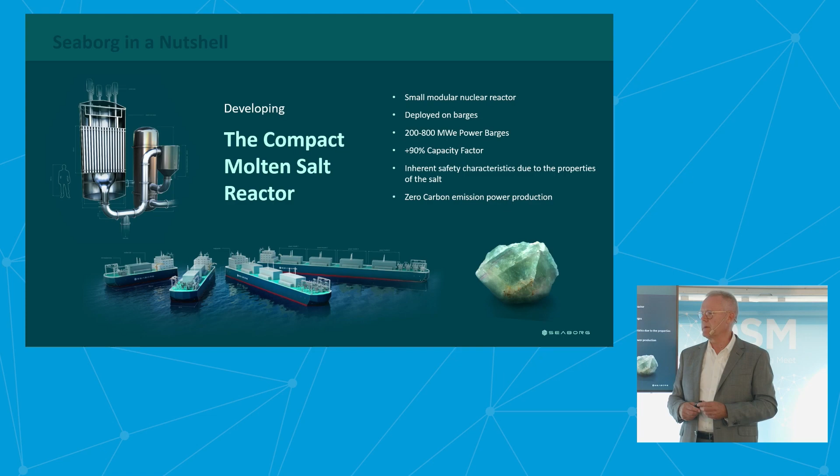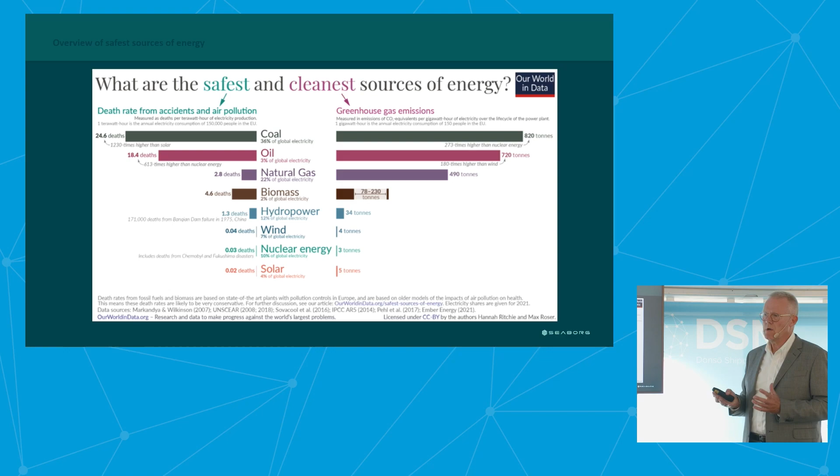And nuclear, everybody says, oh, it's so expensive, oh, it's so dangerous. But the fact is, as illustrated by this slide, when we talk about a source for energy, nuclear comes down as one with the lowest emissions, and not the least, the most safe supply of energy.

And that is why it's not conceivable that if we are to make a transition from fossil fuels, we will need all the resources that don't emit CO2 in order to do this. Whether it's wind, solar, hydro, nuclear, everything needs to be used. And the challenge ahead of us is, how do we use this in the most clever way?

Now, I've twisted this to try to accommodate for the safety aspect of this. I've spent 30 years designing and licensing technology within refineries and petrochemical plants, and I think with nuclear, this surmounts everything I've ever experienced before in terms of addressing safety issues.

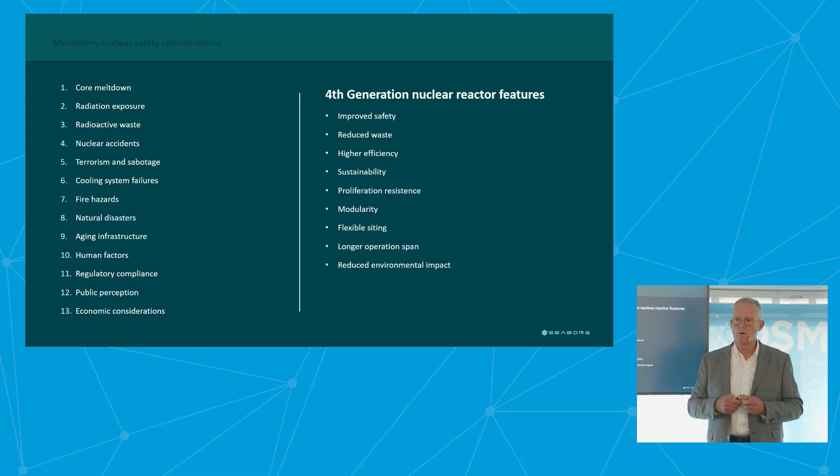Now, what we do is that we have a reactor, and the reason why having this salt allows us to operate a nuclear plant in a way where it's not pressurized as it is with conventional reactors. That is why the risk for a rupture, or the damage caused by a rupture of a reactor, is much, much less.

We have shown you the 4 sizes of the reactors, and the reason for doing so is that one of the concerns many times when we talk about nuclear is that it's very expensive, it's claimed. And that is a fact, at least when it's conventional. But the approach we are taking is to modularize and put it on a barge, which means it's constructed in a shipyard. And if there's something the ship industry is really known for, it's its ability to mass produce and to produce at the same quality and standard all the time. We're trying to leverage this with this technology.

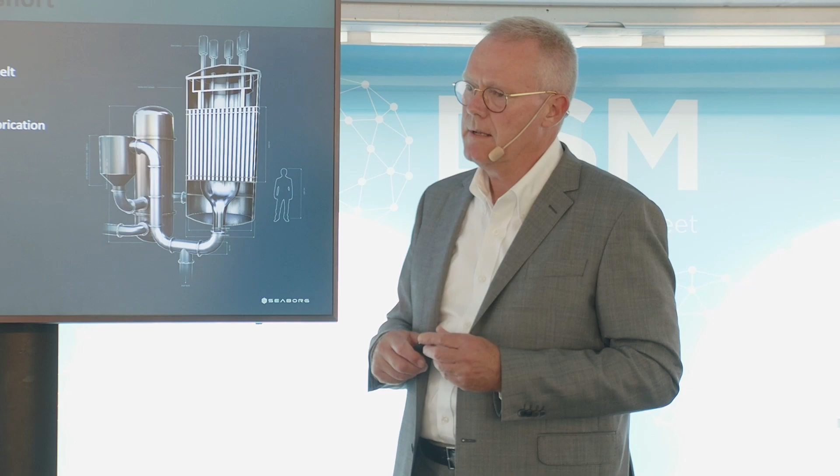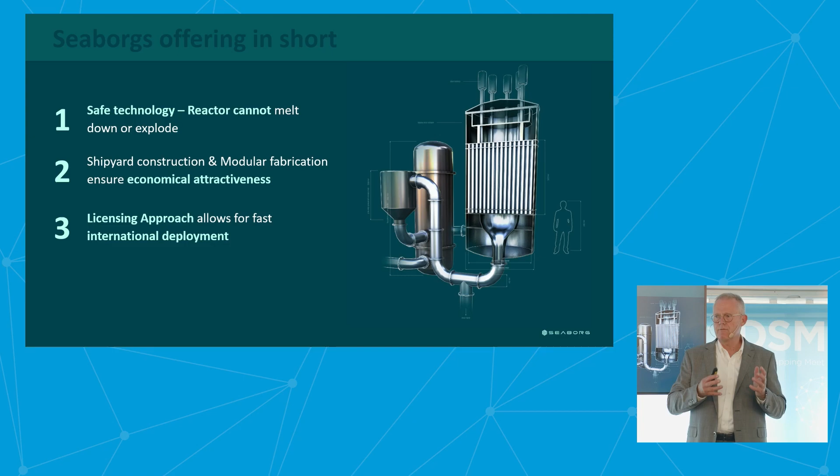Then we also have a license approach. I could spend an hour talking about the license and the obstacles we'll have to overcome, but we are trying to benefit from the IMO regulation, which is common for the entire world, and then combine that with the rules applied from the IAEA, the International Atomic Energy Agency.

Last but not least, in order to be successful as a startup, we need partners, and we need to be able to make a project, not least the first one, where financing is one of the things we try to solve as well.

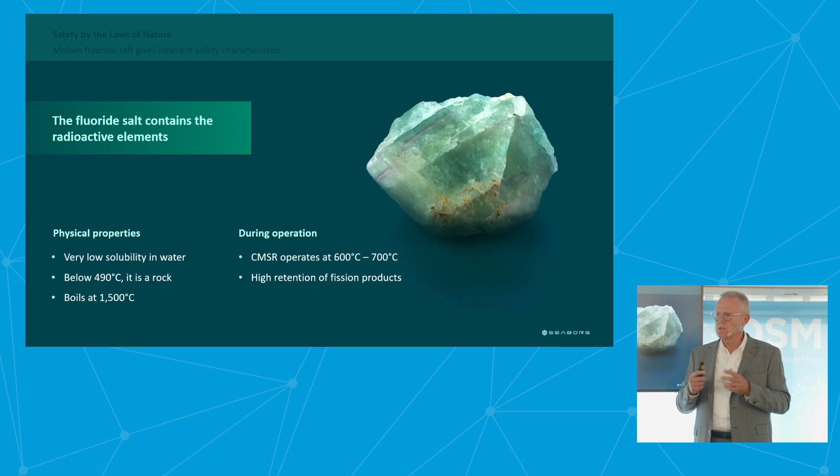Just to show a few things why this salt is so nice - I haven't brought an example today, but it is a rock; even with uranium in it, it's still a rock. The characteristic of this salt is that once heated to around 500 degrees, it becomes a liquid, and only when it reaches about 1500 degrees will it start to evaporate. That's what we're trying to utilize in the reactor.

The barge, as it looks like here, we've tried to illustrate to understand how it really works. What we do is actually install 2 reactors in the middle of the module. It's fueled, and then it can operate for 12 years without having to open it up and refuel or do anything. So the risk of proliferation and the hassle of handling nuclear waste is minimized. After 12 years, we will install another 2 reactors, fuel it, and then it can operate for another 12 years.

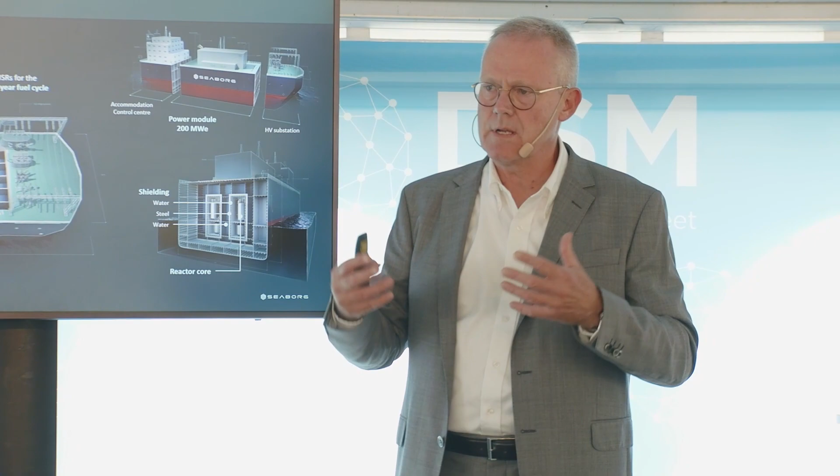So a barge lifetime will be 24 years. Again, with the barge setup, once after 24 years you can tow away the barge and put in a new one. In that way, we try to address some of the typical concerns when dealing with nuclear. This is the module, the middle part, and when you add modules, that's how you eventually get to 800 megawatts.

As a startup, we cannot do this ourselves. There is an investment of several hundred million dollars, even billions, depending on the size of the barge. That's why we have made a consortium together with Samsung Heavy Industries, which I'm sure all of you know, very known for their quality and ability to build very large projects with very intensive construction time.

And then we have combined this with another very large Korean company called KHNP. It's part of the KEPCO organization, and they are one of the largest operators of nuclear power plants, not only in Korea but also outside Korea. With this combination, we think we have a good opportunity to provide power, not only in our area, but also, as someone was explaining earlier today, in areas where you don't have wind.

Like close to the equator - it's obvious to consider that a barge like this could be employed there too. Now, power is of course the electricity that can be provided to the grid, and that is the main and initial target for a company like ours.

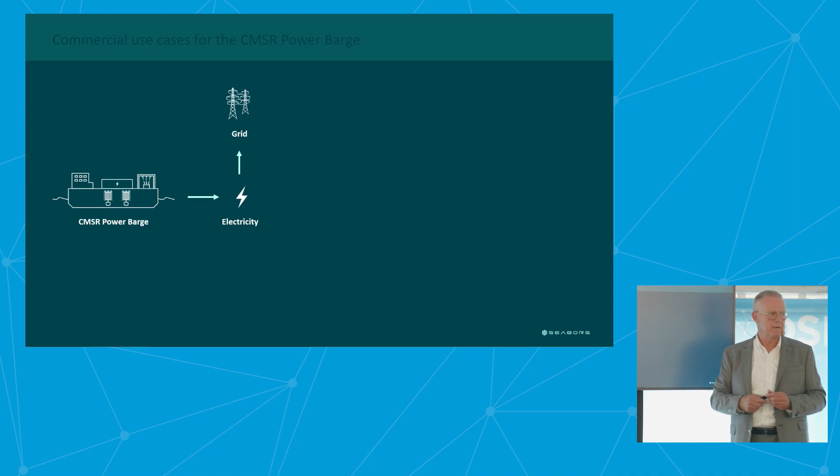But we have been talking, standing here with my 2 colleagues, about hydrogen as a product to be used directly as a fuel. It can be done - we've illustrated it here mainly for some of the smaller vessels or smaller applications. But it's obvious also to consider, as the 2 previous speakers from Wärtsilä and Stena mentioned in the last session, methanol and ammonia as obvious marine fuels.

In order for this transition to be really credible, and not least to happen at the pace we need to handle this climate issue, the power that supplies the hydrogen needs to be cheap. This is where we come into the picture. So basically, what we're offering is a technology that we develop in Denmark. We build it in Korea, and then we intend to power the world. Thank you very much.

Thank you. Oh, that was loud. Sorry about that. Thank you all. Yeah, you can stay or you can leave, that's your call.